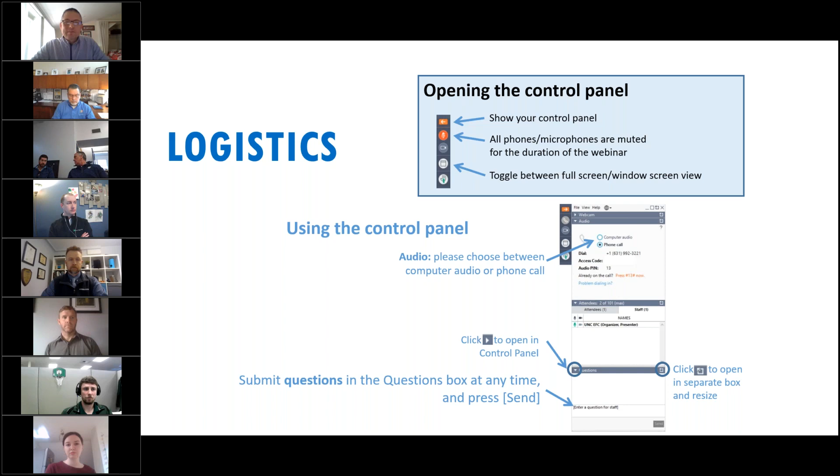For those who aren't familiar, the Stormwater Innovation Center is very collaborative, developed in collaboration with many different organizations, including the Providence Parks Department, Audubon Society, Rhode Island Nature Conservancy, SNEP Network, among many others. Most of our mission is to provide to the public, as well as green infrastructure professionals, the lessons learned in the design, implementation, and maintenance of green infrastructure systems. We have access to over 30 stormwater BMPs at Roger Williams Park in Providence, Rhode Island, to help demonstrate these lessons learned.

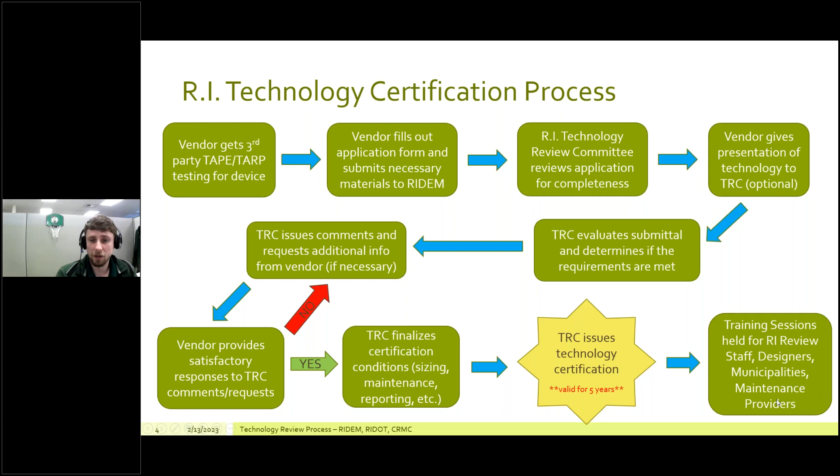From there, we have training sessions like we're having today. Initially, we'll hold it for the review staff in Rhode Island to make sure that we're all reviewing it in a consistent way. And then we'll also hold trainings for designers, municipalities, and eventually maintenance providers.

So what is TAPE and TARP? TAPE is the Technology Assessment Protocol Ecology that's run out of the state of Washington. They have a really thorough program for evaluating these technologies. In order to get certified as a water quality BMP, you need either TAPE certification or to provide third-party testing that's essentially on par with those requirements.

If you look at Appendix J of the Rhode Island Stormwater Manual, you can find more information about that. And then TARP is the Technology Acceptance Reciprocity Partnership, which kind of fizzled out, but it initially consisted of about 6 or 7 states that were all trying to work together to certify technologies.

Another honorable mention would be the New Jersey Department of Environmental Protection. They have a pretty rigorous lab testing program for pretreatment devices, so we also accept that as well for pretreatment.

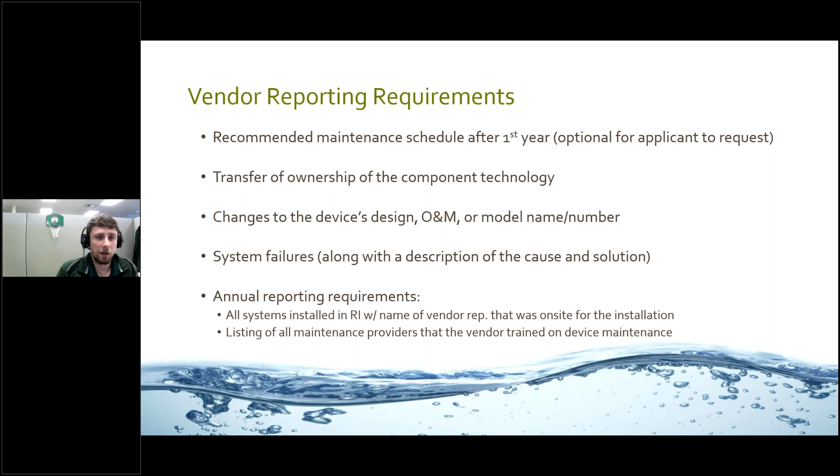Once vendors get their certification, they have various reporting requirements relating to how many systems are installed, where they're installed, any system failures or changes to the device, and transfer of ownership. Applicants can also request a recommended maintenance schedule after the first year, because sites can vary with pollutant loading quite a bit. So it's good to take a look at what you get after the first year.

Like I mentioned earlier, the certification is good for 5 years, and if the vendor would like to get recertified for that device, they need to have the adequate reporting I mentioned previously for the last 5 years, along with any additional studies, testing, or certification they might have gathered over that period. The device still has to meet the pollutant removal requirements, so say one of those reciprocity certifications gets revoked, that could affect their ability to get recertified.

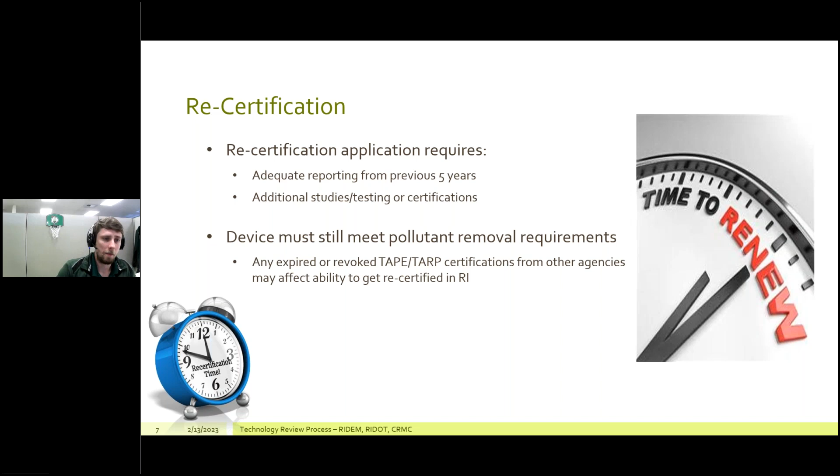If you go to the DEM stormwater permitting page, which I have right here, I'll click on that. You go to stormwater technologies, and I'll actually open up the certification for the FocalPoints so that you can all see that.

So this is the DEM stormwater page. You go to stormwater technologies. Now that will download the list, open that up.

Just give it a moment to load. There we go. And here are the approved devices.

So these are the water quality BMPs. Then we have proprietary and pretreatment devices. So you go over to the FocalPoint, click on this hyperlink right here.

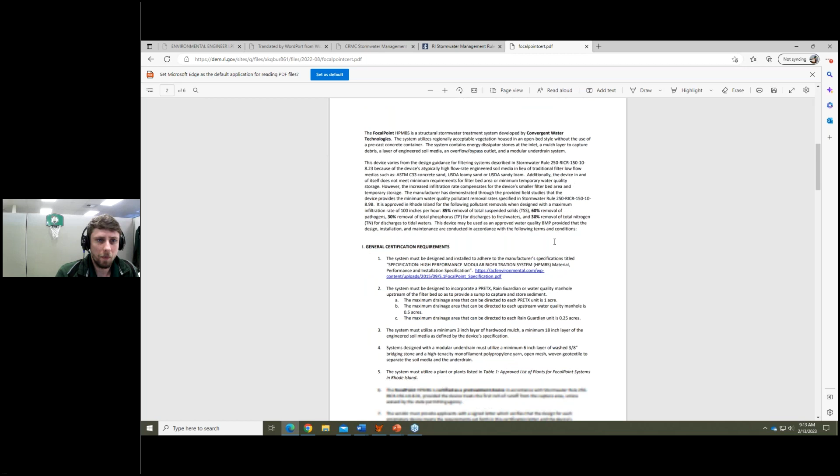And that brings up the certification, gives you all the contact information for the vendor, kind of explains how this ties into the Rhode Island stormwater rules, and mentions all of the testing that they did to accomplish this. And also a brief description of the technology, mentions the removal rates that it has, and then various design criteria.

So for this product, it needs to have some form of pretreatment for it. Rob will get into that in his design overview. And then you can just see here other requirements.

So here it's certified as a water quality BMP, and this is how it must be designed. We also have maintenance requirements, reporting requirements, and then rights. You can see Eric's signature down there.

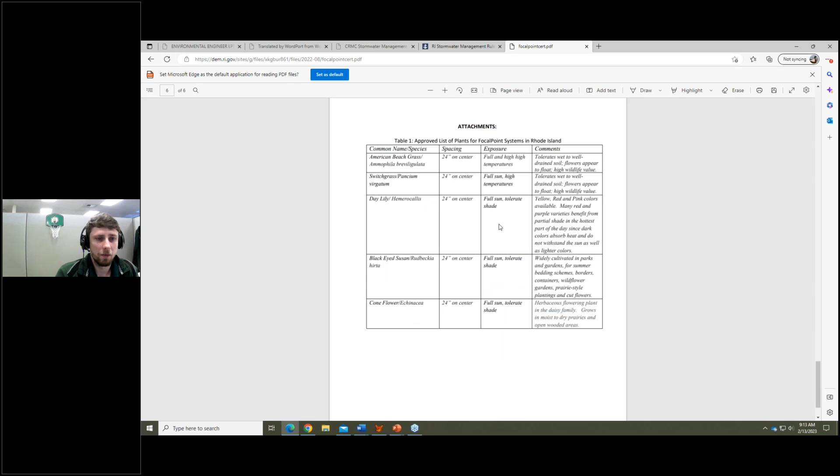These are the various plants that it can be used for the FocalPoint, and we also mention a little bit about the sizing in this requirement right here. So I'll get back to my presentation.

So that's about it. That's all I have. So we'll open it up to questions now if anybody has any questions.

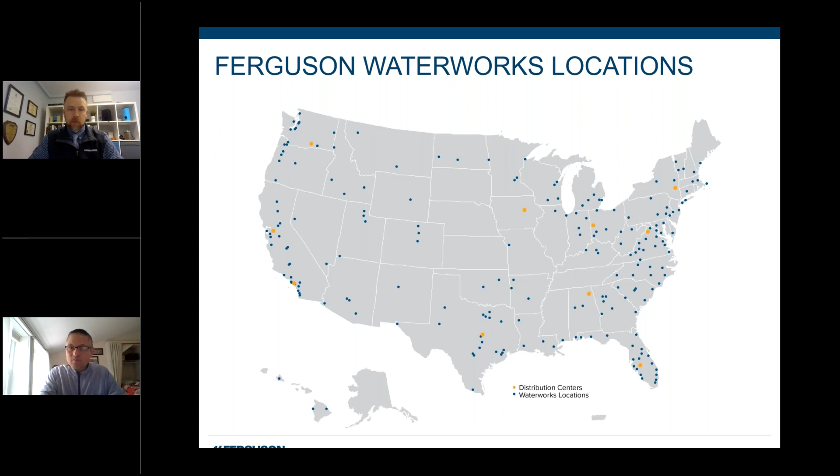Just to kind of highlight the relationship as well, Convergent Water Technologies are the innovator and manufacturer of the FocalPoint system. Ferguson Waterworks is the distributor or the seller of that system, and we also provide all of the engineering technical support that goes along with incorporating the FocalPoint system into projects.

Ferguson itself, a national company, a large footprint, about 33,000 associates. I just throw it on the board just to show that we've got some pretty big coverage there, and also have the ability to service projects in a very local way via all the different branches that we have and the experts we have on our team.

We work with all kinds of stormwater solutions, and I think one of our superpowers as a distributor is that we can look at all kinds of different systems that are out there and pick and choose different parts and pieces and come up with really interesting systems. You're going to see some of that today when it comes to having the pre-treatment and some expanded storage potential, as well as bypass protection and things like that.

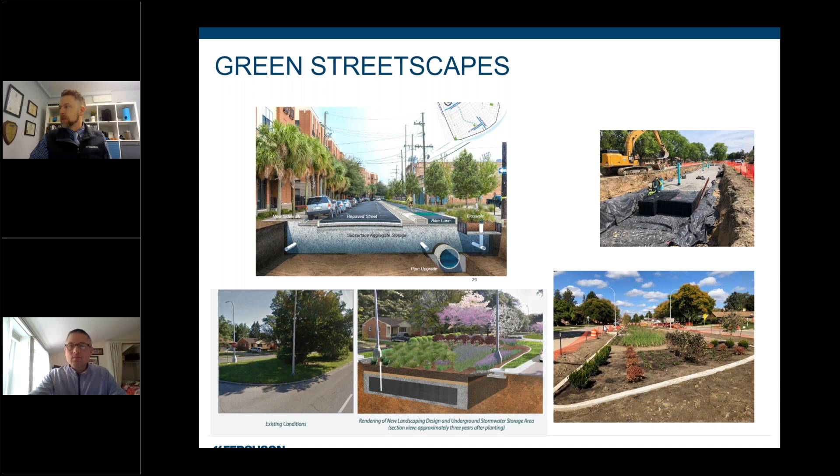No matter where you go, everyone's trying to do more with stormwater, trying to fit stormwater into places where it previously wasn't located, and we just had conveyance. Now we're trying to, when we look at these green streetscapes and things like that, we're space limited, and we're trying to do a lot more with stormwater, treat larger events and things like that.

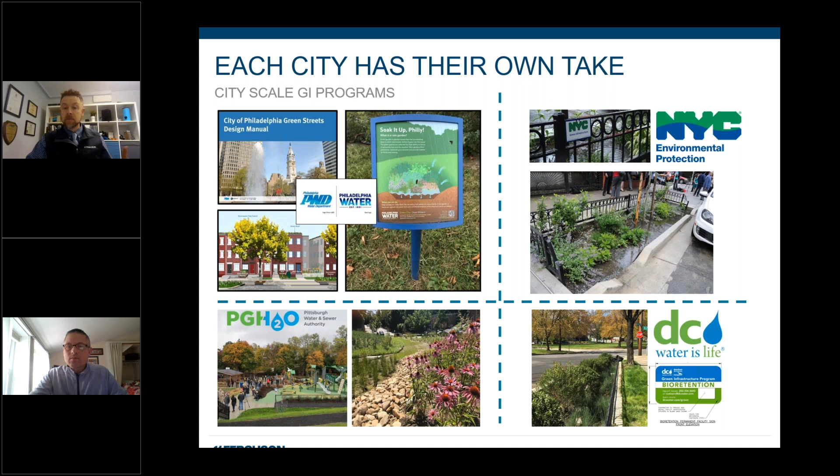Scott, I think I can hear you type in there a bit. You want to mute there?

Thanks, mate. Cheers. And each city has their own take. So no matter where you go, whether you're in any of these bigger green infrastructure cities, Philly, New York, DC, Pittsburgh, everyone's trying to come up with different ways to manage their wet weather, most often for volume, but in some cases for water quality also.

But when you get into these urban settings, there's a lot of complexities that come along with that. You're dealing with tight spaces - that's probably the number one thing. Just not a lot of room left on a site to manage stormwater. You might be working around existing infrastructure, other kinds of conflicts, affecting local business, and in the municipal retrofit world, we've got to think about what's the short-term and long-term impact with digging up a certain portion of the street and putting some kind of system in.

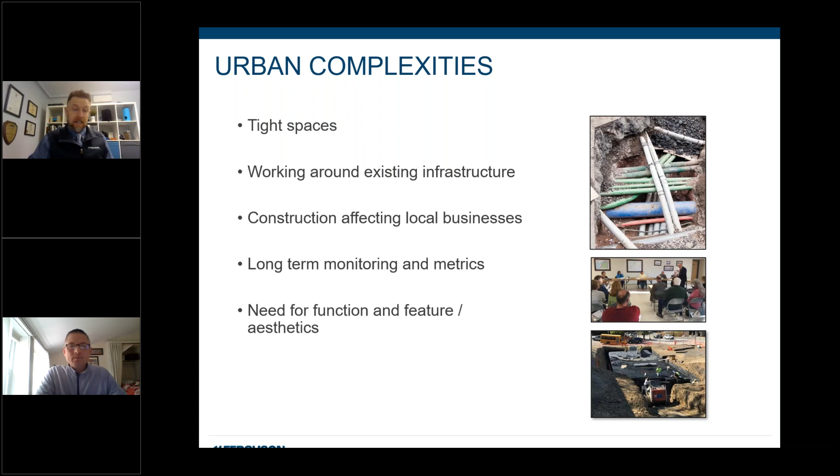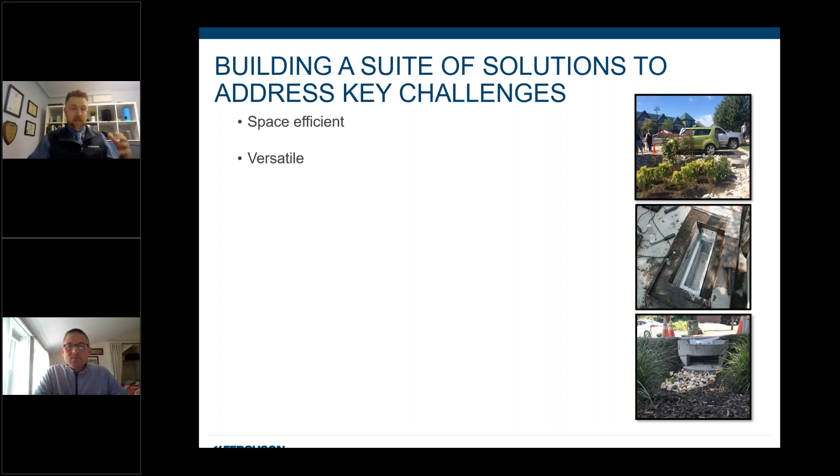And then what I'm continually trying to remind people is it's not about just digging a hole, throwing something in the ground and moving on. There's a need to make sure it's actually working, maintaining it on a regular basis to make sure that these systems are thriving. And then there's that balance too - it's not just about processing or storing stormwater, but hopefully we can actually make these systems look good as well. That's a big focus of ours, to try to balance that function with feature.

So essentially what we've built out over the last 6 to 8 years - and Scott and I have collaborated very closely on this in past roles and now in our current roles, Scott at Convergent, myself at Ferguson - is trying to come up with a suite of solutions that's space efficient, probably number one thing. Versatile and flexible is also really important. High performance, in this case today, for a water quality standpoint. Sometimes that's for structural loading and different things, depending on what kind of product you're looking at.

Easy to maintain, because maintenance does have to happen. So let's try to make it as easy as possible. Cost appropriate. And then think about how can we extend the performance of some of these systems to address some of the challenges related to resiliency and climate change.

And then just a little tidbit, and we'll touch on this a little bit throughout the presentation - one of the biggest challenges I keep seeing in urban green stormwater infrastructure programs or retrofits ties back to maintenance. And we keep finding this theme of, hey, if you can put in better pre-treatment or upstream filtering and screening, we can probably help that system last longer and continue to perform moving forward.

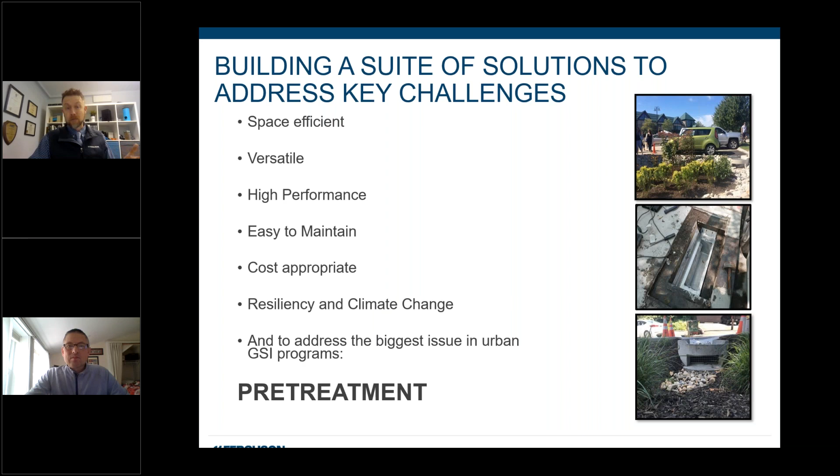And what I love about this is not only do I see this all over the place, but I really like that locally in Rhode Island, as we were going through the process with FocalPoint, one of the key parts of the certification is that pre-treatment is required. And we loved that that was the case, because in so many states, it's kind of optional.

It's not really regulatorily required, and if it's not regulatorily required, most people choose not to put it in because of the cost piece. But we found the better job you do with pre-treatment, the more you can extend the performance and life of a system like FocalPoint, and also reduce the cost and frequency of maintenance. So pre-treatment's a big deal, and Rhode Island certainly knows that. So again, balancing function with feature.

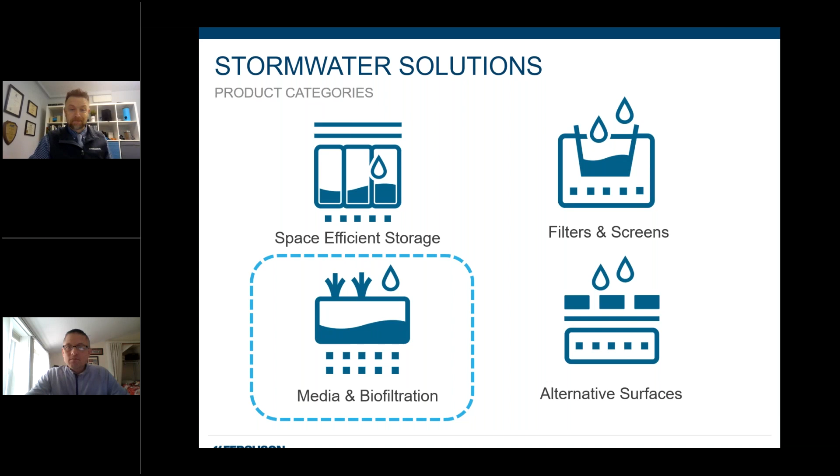The FocalPoint, as you'll see today, allows it to fit into small spaces, functionally process, treat, and manage stormwater, but can also look pretty sharp too if it's done well. So we have 4 categories of solutions: storage, filters and screens, media and biofiltration, and alternative surfaces. But for today, we're really just focusing on media and biofiltration. We'll talk a little bit about storage as we go along, because there's a modular storage component of the system that allows us to manage volume as well as the water quality processing of the FocalPoint.

All right, so let's dive in. The FocalPoint biofiltration system, as you can see in some of these images, has a small footprint. It's a modular high performance biofiltration system. We're using 100 inch per hour media. For those who aren't familiar with rates of media, that's a high flow rate versus a typical bioretention or rain garden system that might process at say 2 to 5 inches per hour. So we're treating at a really fast rate.

We're providing treatment for a variety of pollutants, which we'll touch on in a minute. And we've gone through and been very diligent in our testing to make sure that we've got approvals and certifications in all of the northeastern states and others too. We also meet all of the MassDEP ConCom requirements for using innovative practices, as well as the BWSC regulations for phosphorus. So really useful to a lot of different types of projects up in the Northeast.

To tie back to what Chris was saying about what kind of testing is needed, we've gone through a full-scale third-party field test to TAPE standards, and then we've also more recently gone through an NJCAT, NJDEP process to get verified and certified as a green MTD for folks working in New Jersey. That's less relevant for this presentation today, but we've been working hard on doing all that testing in the background.

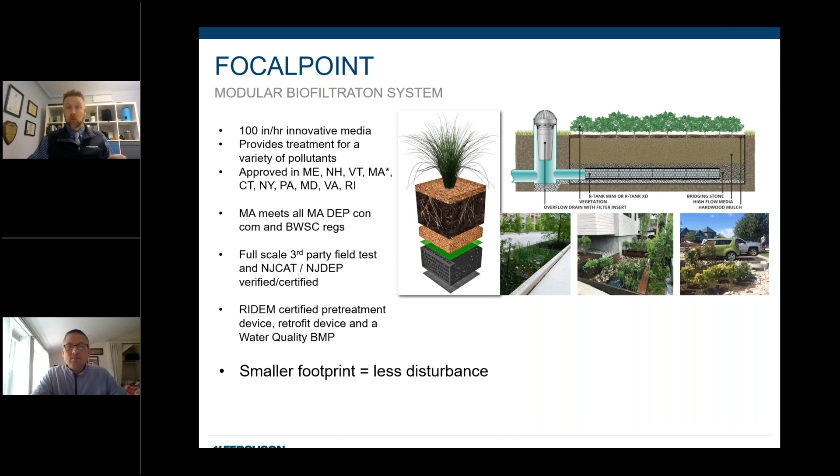But the cool thing about going at a fast rate is when you speed up that rate of processing stormwater, it allows you to shrink up the footprint considerably. So the FocalPoint's usually only going to be about 8 to 10% of the size of a typical surface green infrastructure practice like bioretention, rain gardens, and other types of organic filters.

When you have a smaller footprint, you have less disturbance, which is really helpful, specifically for retrofit or digging up some kind of city street to do some stormwater work. You don't need a lot of space. It's got a smaller maintenance footprint, so that's nice - a smaller area to have to deal with on a regular basis.

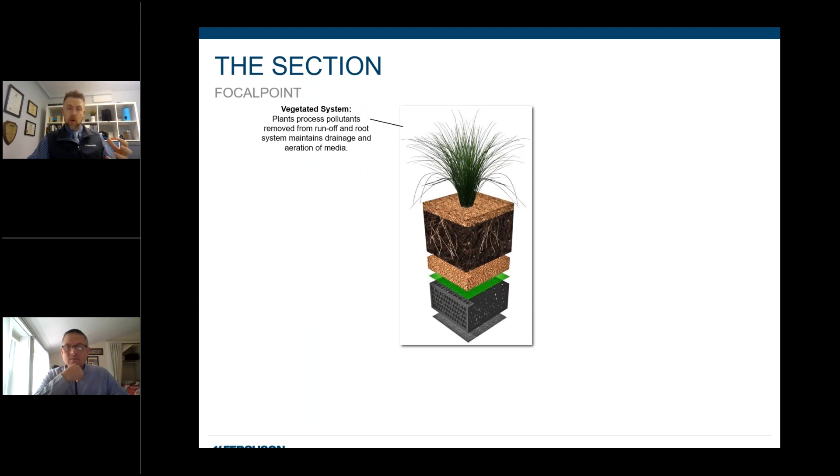And what I love is that because it has a smaller footprint, you could now actually go back to locations that you maybe previously overlooked - maybe you went to another site and thought, oh, we'd love to do a bioretention system here, but it's going to fill up half the soccer field on a school project, or there's not enough room between these two driveways on a city street to treat the full inch. Well, now with FocalPoint, you can go back to those spaces and say, we can tuck this off to the side of the soccer field, or we actually can treat the full 1 inch rainfall event between these two driveways using a FocalPoint. So it gives you that ability to go back and consider those locations, and certainly on tight sites, which are highly developed, it gives you the opportunity to manage stormwater in a very space efficient way.

So let's take a look at the section. The FocalPoint is a vegetated system, so we do require plants for that ongoing uptake of nutrients, which they want. Chris mentioned in his introduction that there is a list of plants that we have specifically for Rhode Island that you can pull from.

We have recommendations for what types of plants, and in the case of Rhode Island, there's a list of about 8 plants, and we also have recommended spacing for those plants. We don't provide the plants, but we provide that guidance and can help review that when projects come through.

We don't generally put trees in this system. We really haven't seen trees do particularly well in these high flow systems, some of the early tree box filter type concepts. It's a media that's mostly sand and fine stone with a small amount of peat moss for organic matter, so it's not that deep, rich planting soil a tree needs to thrive. So we generally go with smaller perennial plants, switchgrass, black-eyed Susans, daylilies, things that do well in droughty periods but can also handle heavy inundation.

So we can help with that. But the cool thing is you've got a small footprint, so if you really wanted trees, you can put trees immediately outside of the system in a nice, deep, rich planting soil where those trees will thrive and become part of the overall aesthetic for your site.

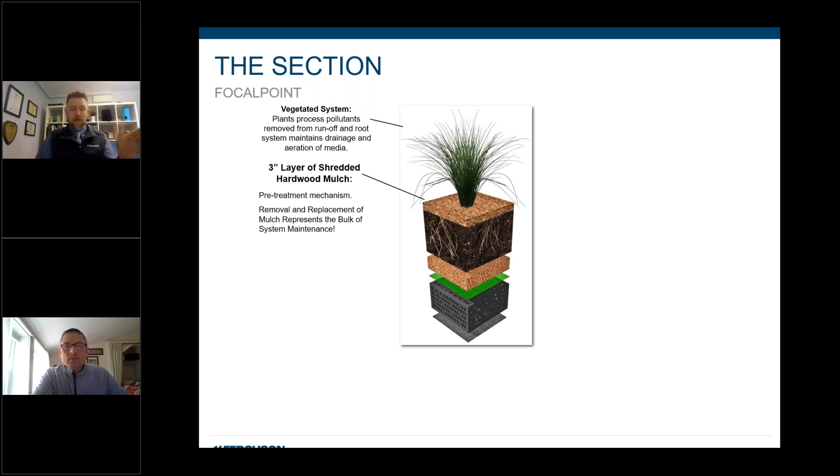We start with a 3-inch layer of hardwood shredded mulch, diligently screened so it's less susceptible to floating, and we don't want a mulch with a bunch of fines that will clog the surface. So it's a well thought out mulch.

That mulch actually really grabs and traps a lot of sediment load if you don't have good pre-treatment upstream. So that's really your focus of maintenance, removing the mulch and putting it back from time to time. I'll show you some slides on maintenance a little bit later.

Then we go into 18 inches of high performance media. That media is what's flowing at that 100 inch per hour rate, with great pollutant removal efficiencies. These are our actual tested efficiencies, but for RIDEM, these are the numbers that are awarded: 85% TSS, 60% for pathogens, 30% for phosphorus in freshwater, and 30% for nitrogen when the system is in a tidal water condition. So great high removal efficiencies in that small footprint.

After we get through the media, we go to a layer of 6 inches of bridging stone. We don't run typical fabrics through this system because those are a known source of clogging from fines over time, so we go directly from the media to this bridging stone.

We provide the stone for 2 reasons: one, so it's truly a clean stone, and two, so that the media sort of nests into that stone. We want the materials to pair well together so you don't have the media falling down through the stone. That's traditionally why a fabric would be used there, to create that separation, but we're doing that without a fabric.

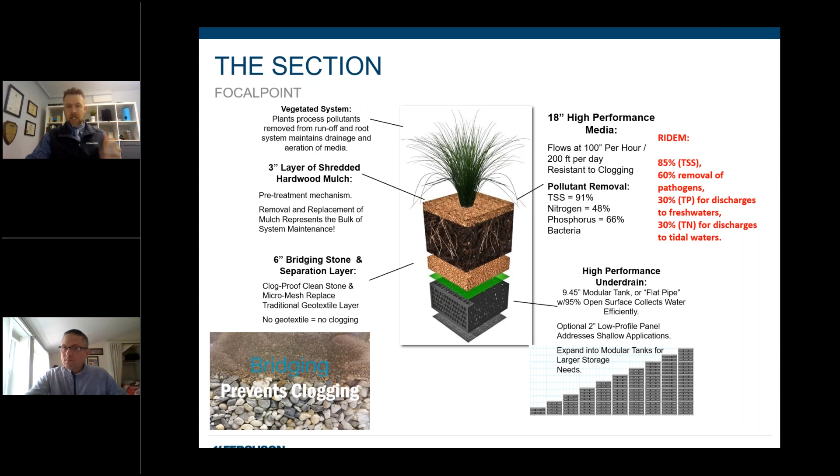So we use a modular box underdrain, called the R-Tank. Some of you may be familiar with this. I'm going to take a little turn to chat about R-Tank for a second, because it's important to understand what R-Tank is so you can understand the benefit it brings with the FocalPoint. So let's touch on R-Tank, and we'll come back to FocalPoint.

R-Tank is a 95% void space modular subsurface storage system. 95% voids means we can minimize excavation and maximize storage. With a high void space, we can overcome shallow groundwater and work around unexpected utilities because it's a modular system. We're generally using this for detention and infiltration.

For FocalPoint, it creates a really nice, high efficient underdrain. But the FocalPoint itself is really just providing water quality, and most of our projects also need some quantity control. So we can drop straight through that FocalPoint into the R-Tank, and the R-Tank now becomes our volume component to the design.

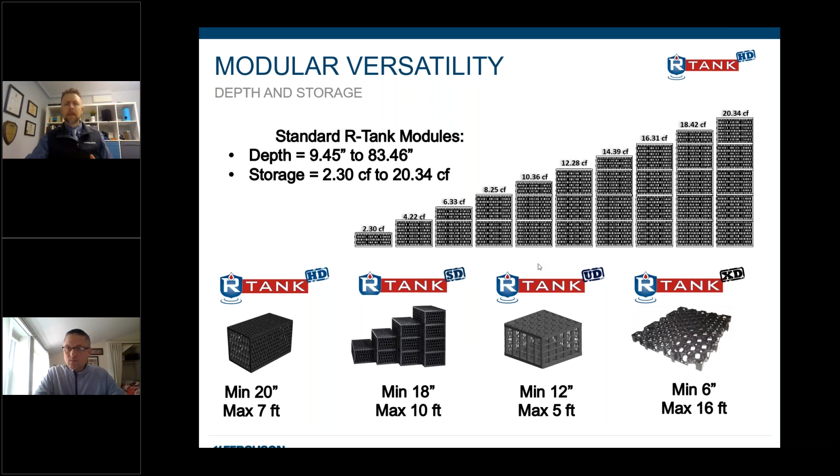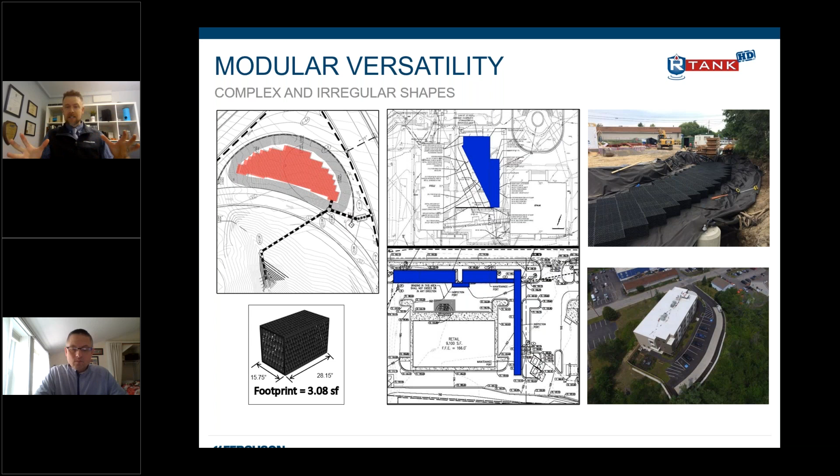We have different modules available, all different heights from 9 inches all the way up to 7 feet, with different strength ratings for different minimum covers. With FocalPoint, we're generally using our heavy-duty module. I have a mini tank I'm holding up on the screen here. It's important to note when we talk about singles and doubles and triples - I'm holding a double. The double has a common mid plate, so it's made as one monolithic matrix of plates, as opposed to having individual components sliding around on top of each other that you have to line up.

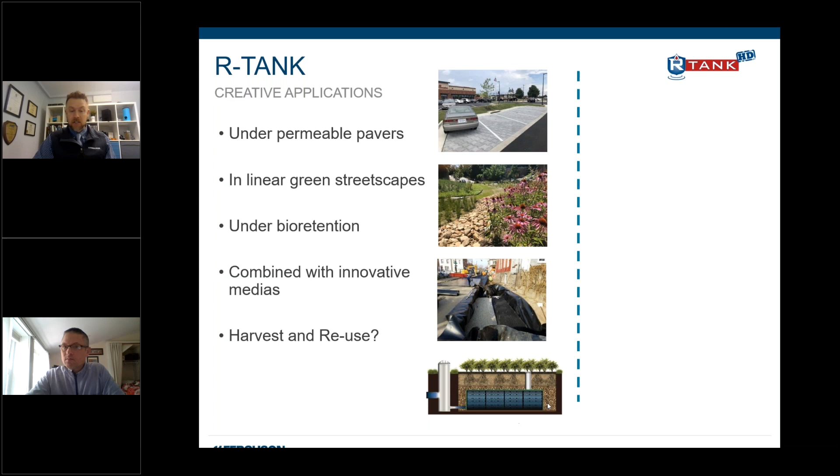But again, we get this modular versatility, and it pairs really well with the FocalPoint because FocalPoint's a small system that's very flexible in shape and size. We can also mirror that with an expanded storage system beneath, so we can really tuck these into weird and wacky spaces and get a lot of storage done. FocalPoint is an awesome treatment, maybe off to the side of the parking lot in little traffic islands. Drop down, and then we can expand this R tank, being traffic load rated, back underneath adjacent parking.

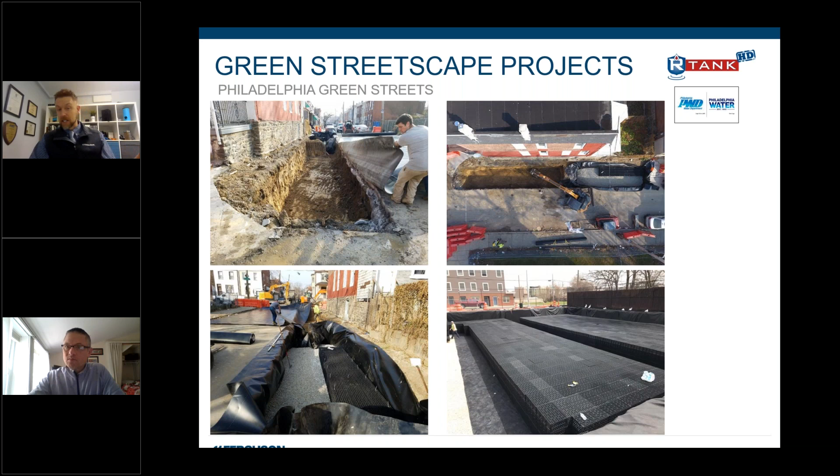And while we've done a lot of work with detention and infiltration with the system on its own, we're now starting to see this kind of creative application space where we can enhance storage under permeable pavers. We can put them in linear green streetscapes, under bioretention, or in the case of today's conversation, create a really interesting volume module that can go directly underneath the FocalPoint.

Where do folks use these? Tight spaces. Where do they use FocalPoint? Tight spaces. So we're starting to see a common theme with why these systems kind of work together. And again, being modular in nature, we can do some really interesting systems - like this project in Philadelphia, with steep streets and a need to terrace groups of tanks to work with that changing grade at the surface. Great way to provide that storage.

All right, so that's our tank. So let's go back to FocalPoint right now. When we're just doing water quality, we've got this very small footprint, somewhere between 2.5 and 3 feet in depth, and we can just pipe it downstream. Maybe that's going to a larger system, whether that's chambers or tanks or a pond, a dry pond, who knows what. But if we want to provide storage directly underneath that FocalPoint, we can do that.

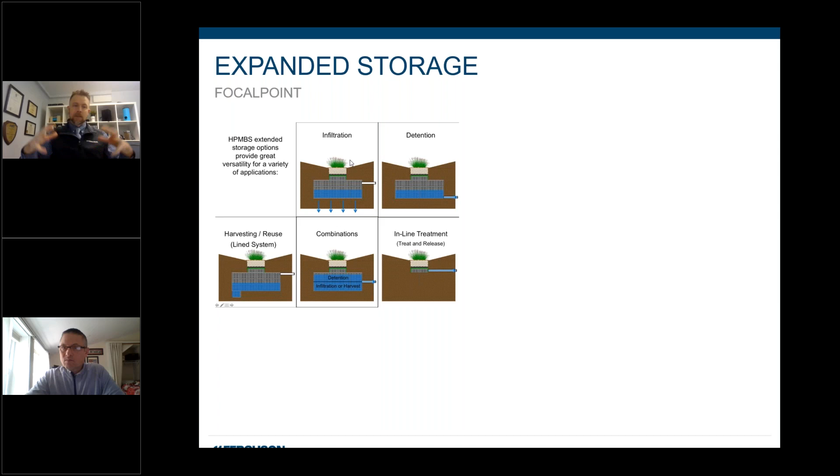You can see that in the images here. So small FocalPoints again, tucked over to the side in little islands, drop down, but now we can expand the storage back underneath parking. So it really allows you to maximize your development opportunity in terms of how much impervious area you have, what your building footprints look like. But it also allows you to fully meet all of the stormwater regulations. Sure, a surface detention pond is always going to be less expensive than anything subsurface, but on these tight urban sites, small FocalPoints drop down, larger R tank.

So again, we can have small FocalPoint media footprints off to the side, expand our storage back underneath. And I would say - Scott, maybe you can nod to agree with this - probably half the projects we do are just water quality and we pipe them out. And then the other half, there's that volume piece, and that's where the R tank comes in.

We've also done projects where there's a couple of FocalPoints around a site that go into one centralized storage system. Or again, you can do the storage directly underneath with their own independent outlet control.

The other thing about FocalPoint that I haven't mentioned yet is that it's a boxless system. So that keeps our cost down compared to some of the other proprietary systems on the market. But it also gives us a lot of flexibility in design. There's not specific sizes of FocalPoint systems. You can do the math, and we'll talk about the sizing in a minute. But you can really come up with an exact size that you need and not have to buy any additional material that you don't need for your site.

It comes in components to the sites. We've got bags of media, bags of stone, bags of mulch. We'll talk about pre-treatment in a minute. And it allows you to create really interesting shapes - it doesn't have to be a perfect rectangle. As civil engineers, we love really nice 90-degree corners on shapes, but it doesn't have to be that way. We can do interesting shapes, kidney bean shapes, work with the landscape, and make it more of a feature than just a functional rectangle of mulch with some plants in it.

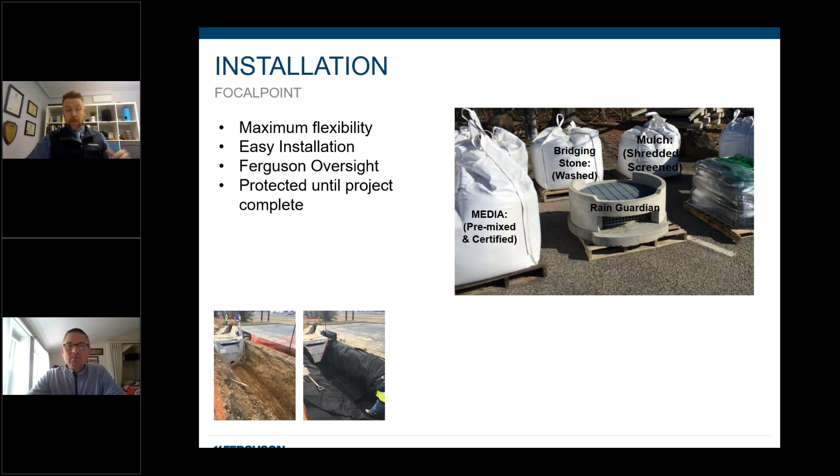Installation is pretty straightforward. You dig a neat hole. We provide about an extra 15 to 20% material, so you don't want to dig some huge hole that you don't necessarily need, but the site contractor digs a neat hole. You don't have to be a certified installer to put this in, so we work with any site contractor. We actually provide oversight in the field.

Someone from either Scott's team or our team would be out there in the field just to coach the contractor through and get it all done right. We wrap the sides with a basic fabric for separation, place the modular boxes, wrap them with that microgrid material, kind of like you're making a bed across the top and down the sides, and flare out or tuck under. Then we bring over the super sack of bridging stone, place 6 inches of stone, 18 inches of media, and then we finally put on the 3-inch layer of mulch.

Then what we'll do is temporarily cover it with a heavy fabric. We call this cap and seal. It's sort of a trendy way of just saying, hey, look, we don't want to compromise this system while the upstream watershed is not stable yet, while there's denuded slopes and sediment and grit that could get in. So we cover it with fabric. Then once the slopes are established, vegetation's in, roads are paved, all those things, you come in, cut open the fabric, take that away permanently, and that's when the plants are installed.

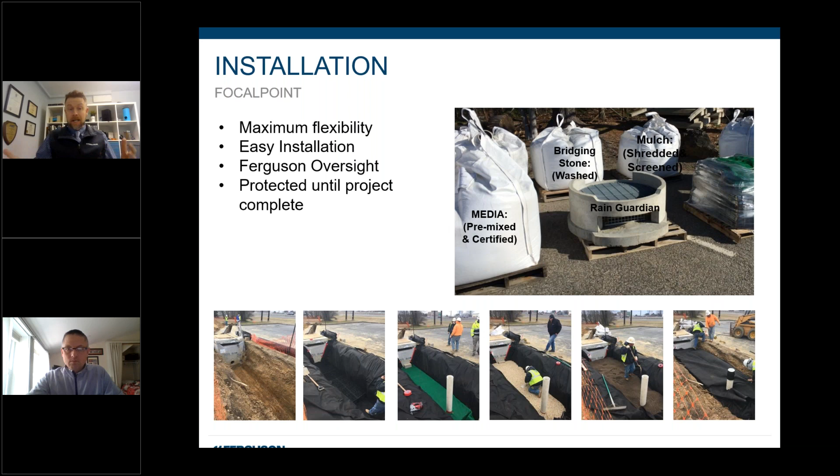We have some projects, like larger scope projects, where they might stay covered for over a year or through a full winter and then get planted in the spring. We also do some retrofit work on the muni side, where they may be able to do it all in one day and stabilize the slopes with sod or put some river stone down and plant it that day. So it may never have to get covered. It just depends on the dynamics of your project.

Sizing. I'm sure a lot of you are like, okay, so you mentioned it's a small footprint, what does that actually mean? So essentially what we're doing is we're taking advantage of our dynamic modeling, right? We're modeling this 100 inch per hour throughout the storm event.

So if we think about a very typical or a standard hydrograph, early on in the storm, the peak flows are pretty low that are coming into the focal point area. So the focal point can keep up with it, and we're processing all that water as it comes in. There's really no need for surface storage at that point. However, when we get to the peak of the storm, now there's this point where the flow coming into the system is starting to exceed the flow rate that the focal point can drain.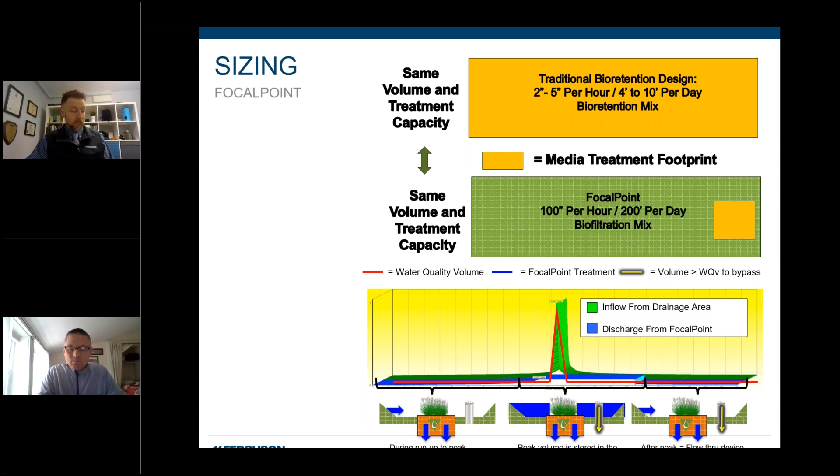And so we do have a little bit of temporary storage, usually at 6 to 12 inch depth, sometimes as high as 18 inches. We just got to think about plants and how long that water is going to sit ponded for. And then as the storm progresses, we get back through to that flow-through device. So we're never statically storing the entire volume under that hydrograph at the surface, because we're processing it as we go. And we have some really nifty little HydroCAD nodes we can use to model that.

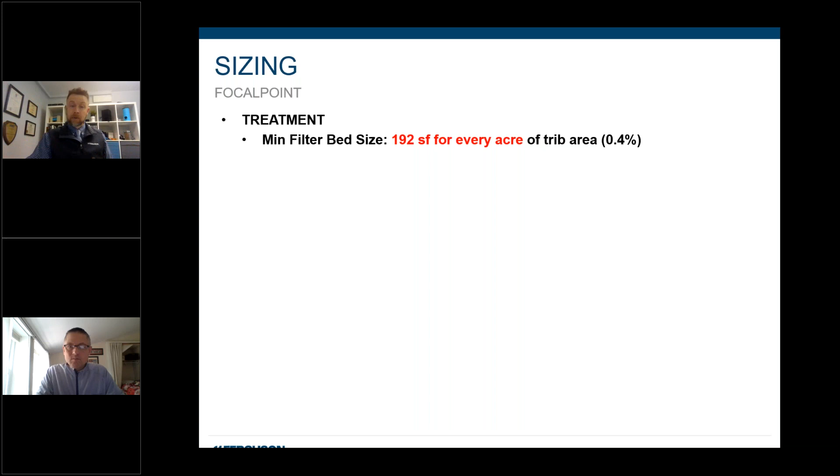We're going to go through that before we finish today. Okay, so sizing. We have a minimum sizing ratio in Rhode Island that we start with. That's 192 square feet of focal point for every acre of tributary area. So if we think about the 10 by 20 parking spaces, it's basically like a parking space being able to treat an acre of parking. So it's a really nice small footprint, easy to tuck in. That's our minimum filter bed size.

So we do actually run a model to make sure that based on the temporary storage we provide at the surface and that focal point footprint, that we can fully process the entire water quality event, which is the 1.2 inch rainfall event for most projects in Rhode Island. If for some reason when we run that event, our bypass gets activated prematurely, we can do one of two things. The low cost option is to find a little bit more surface storage at the surface, so we can draw down that peak elevation a little bit and prevent the bypass. Or if there's absolutely no more room to create a little more temporary storage, we can actually expand the focal point a little bit more beyond that minimum ratio of 192 per acre. So we're going to go through an exercise in a minute.

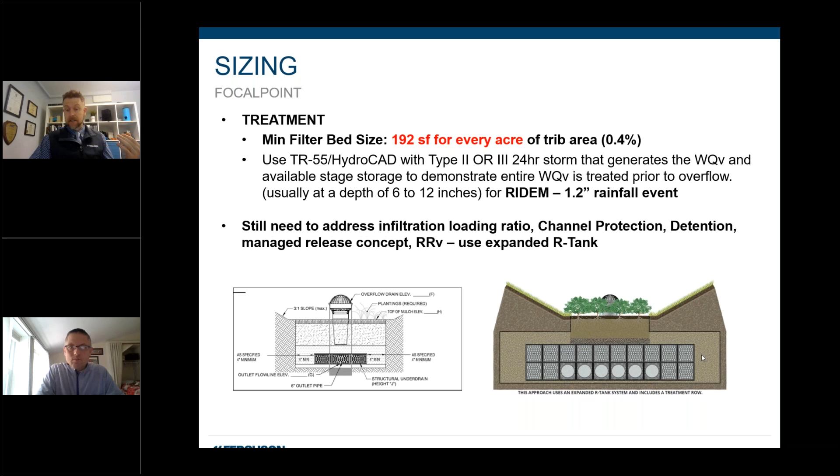You'll see that. What we found is if you've got 3 to 1 or 2 to 1 slopes coming out of that focal point area, it generally works. However, as you start getting more vertical drop-off curves and things like that, sometimes that minimum ratio needs to be expanded out a little bit.

So that's water quality. And then when we have to manage volume for a variety of uses, that's when that focal point can have an expanded R-tank system that goes out over a larger footprint.

We have a really nifty worksheet for Rhode Island as well, so you can work through things step by step that follow the guidance given by the certification Christopher was mentioning earlier. It lists the plants, shows you some tips on the HydroCAD piece. We've got a great stormwater engineer in New England, Loren Joyce is his name, who can also help you work through that and get your bearings to make sure the modeling output is correct.

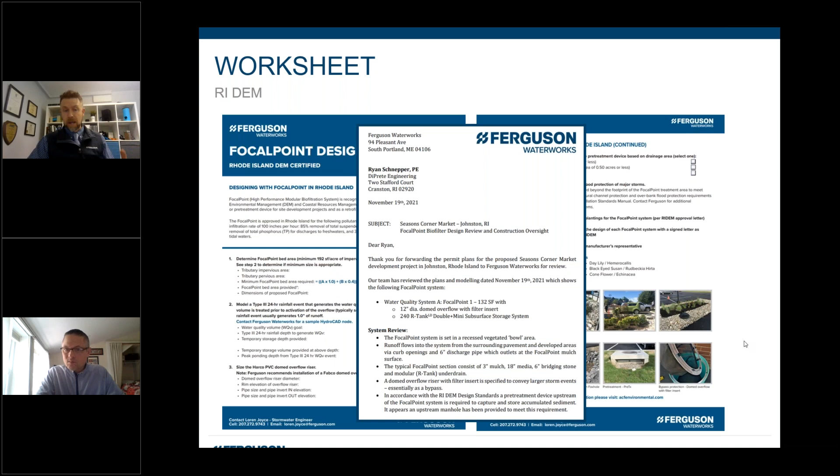We also are required to produce design review letters. So if you're working on a FocalPoint system, reach out to us and we can provide a review and then a letter that you can submit to the review team on the Rhode Island side to show that everything's being done in accordance with not only the Rhode Island DEM certification, but also our standard specs and installation guidelines.

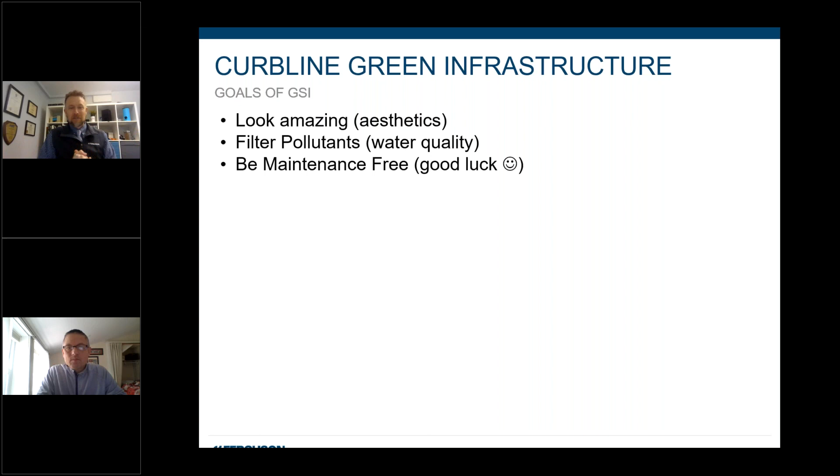Accessories. There's a couple of accessories we often recommend with FocalPoint, but to take a step back, we think about curb line green infrastructure, and that's really what FocalPoint is. It's generally going to be pretty close to the curb line, sometimes you've got a little more space. But when we think about green infrastructure, rain gardens, bioretention, FocalPoints, we really want them to look good.

We want them to filter pollutants, so provide that high level of pollutant removal. We'd love them to be maintenance free, but unfortunately that's not the case with anything in life. Cars, relationships, green infrastructure, it's all the same thing. You got to work at them.

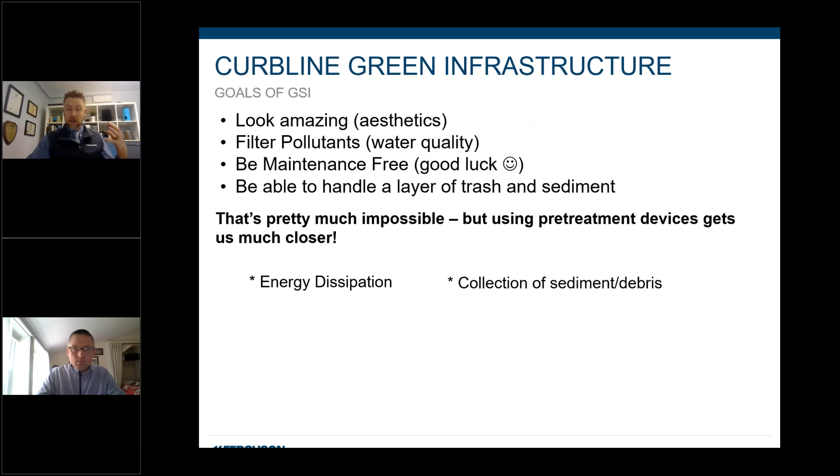But we also can send this full layer of sediment and trash to these systems, and that creates a bit of a conundrum. If we don't have pre-treatment, we're potentially compromising plants by washing them out. We're potentially clogging filter media, so it goes into bypass more and doesn't treat as much water as we think. And if we send all that sediment to the surface of the focal point, rain garden, or bioretention, maintenance becomes a little more tricky, because now you're hand fossicking for sediment all around that system.

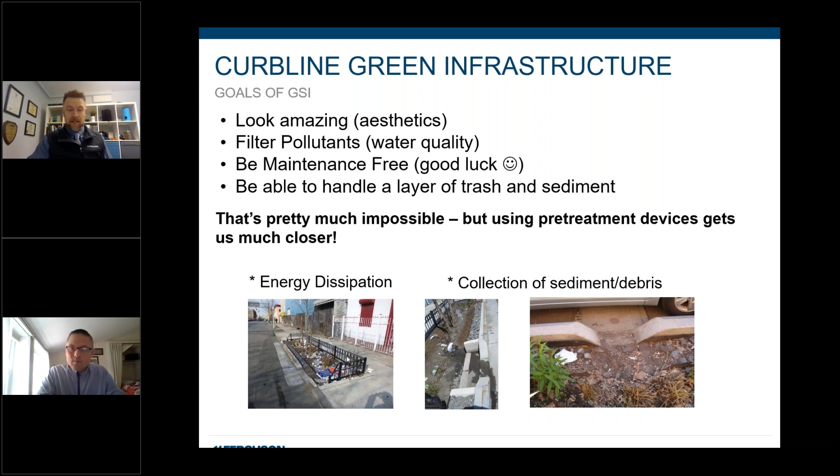So we found that pre-treatment's pretty important to this equation. The great thing is, like I mentioned earlier, Rhode Island DEM agrees with this, which is fantastic. We've got to dissipate energy, collect sediment and debris, but oftentimes we don't have a lot of room to do it. Unfortunately, curb line systems, while they can look good on plan and in artistic renderings, after a couple of good rain events on a city street can look pretty nasty.

Obviously, the civil engineers think this system's working awesome. Look at all that trash it's collecting, fantastic. While the public and landscape architects aren't too sure.

So we have two options as part of that menu of pre-treatment options required for a FocalPoint with Rhode Island DEM. One is called the Rain Guardian, for up to a quarter acre. And then we also have the Pretex, which is up to one acre of pre-treatment. So two different options depending on where it's located, the type of watershed, and the type of sediment you're expecting.

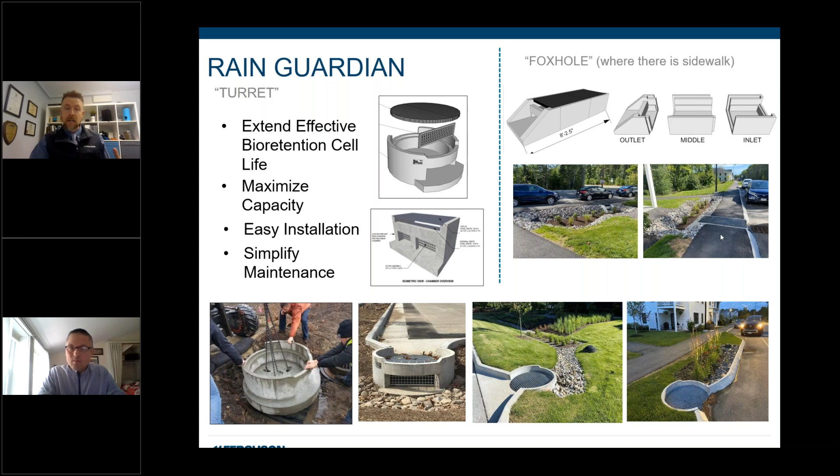So it's a great way, hence the name, to protect or guard that primary asset. This one's called the Turret—it's the circular one. There's a rectangular version called the Fortress, and then one that crosses a sidewalk called the Foxhole, which has all those same components: horizontal screen, vertical filter wall, but also a solid cover on top so you can cross a sidewalk without interfering with your pedestrian and bikeway.

A lot of folks use trench drains here, but the Foxhole adds those filters and screening elements that make it a little more functional from a pre-treatment standpoint. So that's great for small watersheds.

When you get into larger watersheds, Convergent Water Technologies, Scott's company, has a product called the Pretex—a deeper sumped module. It's generally a 5x5x5 box with a 4x4x4 inside, a suspended baffle, a weir, and then a screen on the backside. So now you get your full sump, a little bit for floatables, oils, and grease, and additional sediment storage capacity, so in theory you can store more and maintain it less frequently. There's also an unimpeded bypass across the top in case this initial chamber gets completely clogged or full.

You can see that in practice here. So again, same kind of functional idea: drop that energy out, drop the sediment out, and hopefully send relatively clean water to the FocalPoint for polishing, essentially for nutrients, bacteria, and things like that.

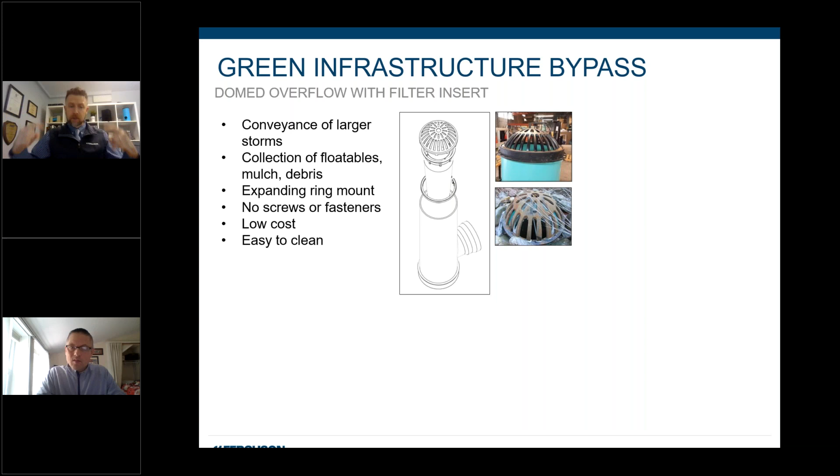Those two items, depending on the size of your watershed, are part of the Rhode Island DEM approval, which we were thrilled with because pre-treatment is really important, and in Rhode Island that's valued at the same standard.

And then the last little accessory—it's one thing to treat the water quality event, but what about larger events? Most of these vegetative practices have domed overflows to take those larger events. Unfortunately, that's where a lot of floatables and mulch can end up and eventually get downstream into whatever you have, whether that's our tank, small diameter pipes, or whatever. So we outfit our domed overflows with a simple permanent filter bag that collects any of that material that gets through.

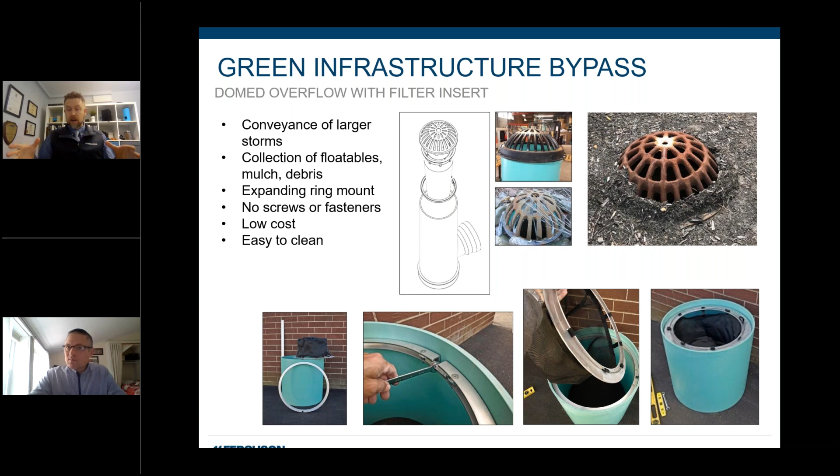Generally with our FocalPoint systems, as you'll see in some of our case studies, we have that Rain Guardian or Pretex at the curb line. We go into our FocalPoint for treatment, maybe an expanded tank if you need to manage volume, and then that bypass has one of these filter bags in it. So you get this space-efficient, high-performance, easy-to-maintain treatment train that's going to hopefully be pretty easy to own.

Maintenance. You guys still see me okay? Yeah, okay, I'm getting weird notifications.

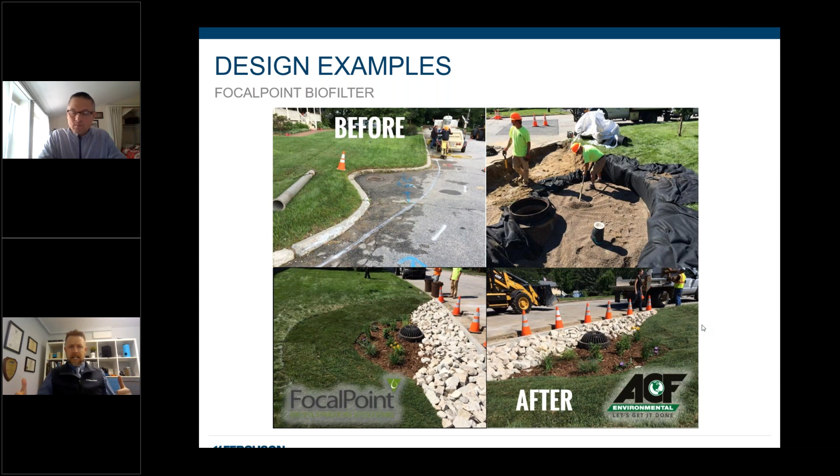Examples: curb line retrofits, easy to do. Here we actually converted an existing catch basin into the domed overflow and built the FocalPoint around it, and we had all kinds of different utility connections to that drain that we had to step in and around. That was one of the earlier projects, from probably 7 or 8 years ago now.

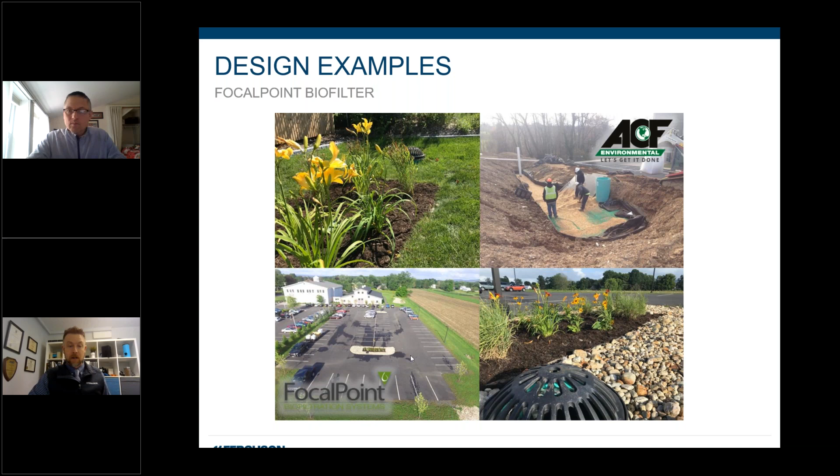Simple—this was a parking lot expansion project, looking to pave an entire parcel and put up a parking lot. This went with a FocalPoint in this island area, and then there were 440 R-Tank mini modules, about 9 inches high, back underneath the parking for infiltration. This one was in Massachusetts, but the cool thing is, you'd need that island there anyway, so using it for stormwater was useful and didn't reduce the number of parking spaces.

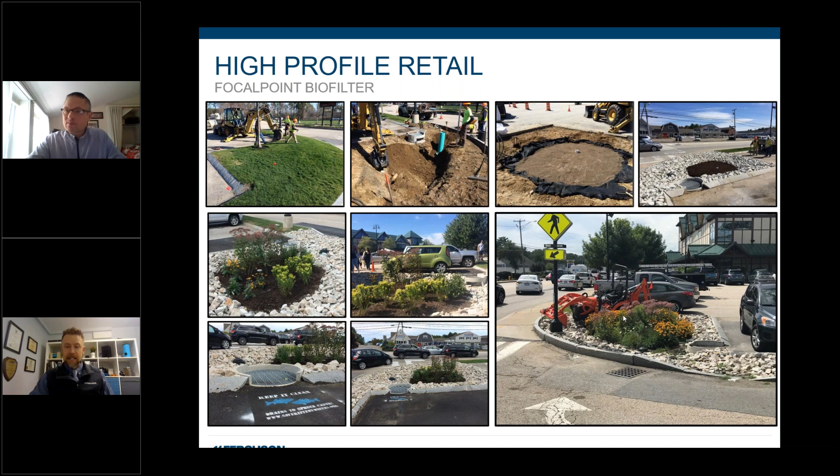High profile retail, this is one of the first ones we did, at Kittery Trading Post. It's been in for probably 8 years now. Sheet flow was already coming to this corner where there was a catch basin. We converted that catch basin into a solid cover manhole, opened up the curb with a rain guardian, domed overflow with a filter bag, and then a FocalPoint was built.

This is kind of its evolution over the years. You can see Public Works installed this one. They got a little carried away with riprap, but that's okay. And now they're displaying tractors in that area, which is interesting.

Dense residential development. Here we have a single-family home that was demoed, and they built this 44-unit housing complex on a postage stamp lot. Still had to meet all the stormwater requirements. So in this little corner here, you can see it, there's a 33 square foot focal point. And then there's expanded R-Tank doubles back underneath all of this concrete area.

For not only infiltration, channel protection, but also flood control. It was designed by a civil engineer, as you can see, 3x11 box, perfect corners, but then collaborated with a landscape architect so that we got some really interesting plantings in that system. And nowadays it looks really good.

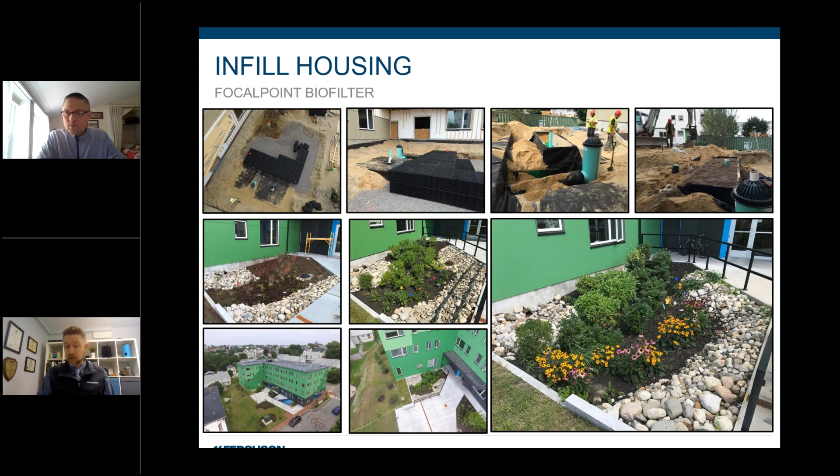What I've found is when you have smaller footprint systems, you can often fold them into tighter spaces, and even more prominent locations versus the old stormwater system you'd kind of toss out back. And when you put them in more prominent locations, I found that generally they get looked after better. Here, the tenants look after this rain garden. I think they don't even know what it is really, but they want their front entrance to look sharp.

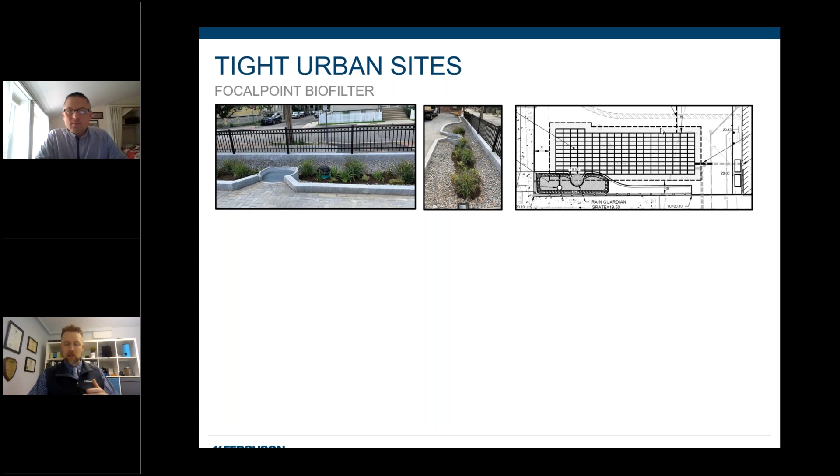This is a great little example of an urban project. Focal point off to the side of a paved parking area. Runoff comes through the rain guardian, hits this focal point. Not the most attractive looking focal point, but if you look at the plan, this is where the secret sauce is, right?

So you've got this focal point off to the side, treating all that runoff, but then the treated and the bypass go into our tank single plus minis, which are about 2.2 feet in height, back underneath that paved area. So that's again where you can leverage a system like this and still do everything you want on a development. We've seen some really interesting things from designers, sheet pile terraced walls, raised planters to work with shallow inverts in the street and pick up roof gutter lines. There's a lot of flexibility as a boxless system.

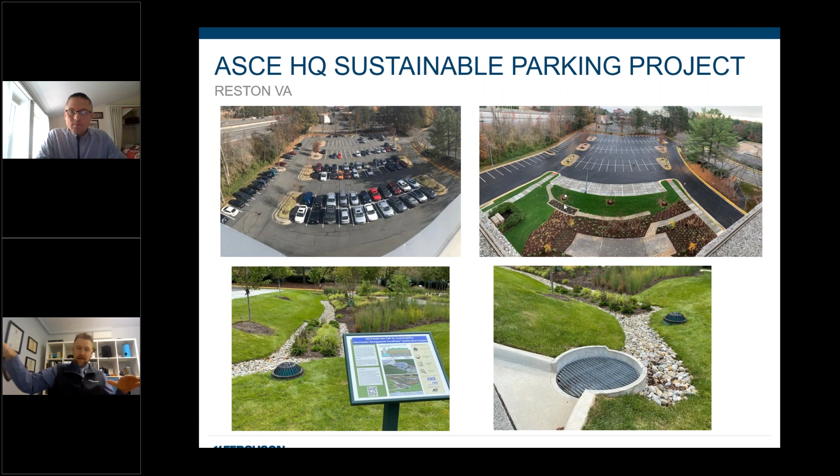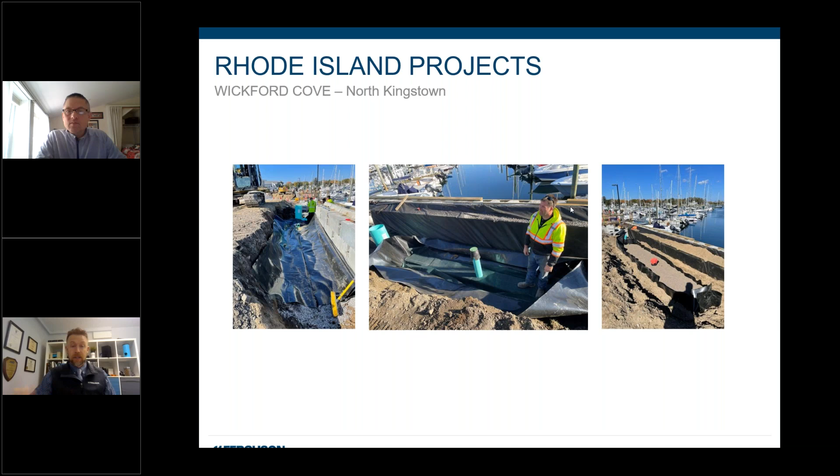We have a system at the ASCE headquarters in Reston, Virginia. We did a kind of walk the talk project down there and incorporated a number of our products. You can see the Rain Guardian here feeding this focal point. Now you'll see there's a lot of space here, but there was about a 5-foot grade change from this sidewalk to this one. So all the retaining and grading that would have been needed to level an area for bioretention, it was way more cost effective to build just a small focal point, have this little river stone channel feed that focal point, working down the grade.

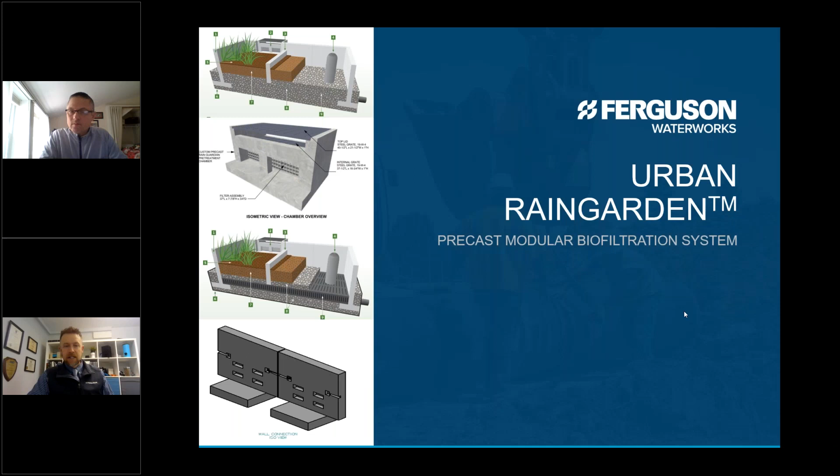The only thing we found, as people start to fold these into green roadways, is that you sometimes get into a bit of a sticky wicket with regard to the vertical curb you're trying to deal with. Since we're boxless, what do you do if you have to drop off a curb? Do you use a deep curb? Now it's exposed on both sides. Is a plow going to tap that and knock it over? How's that all going to work?

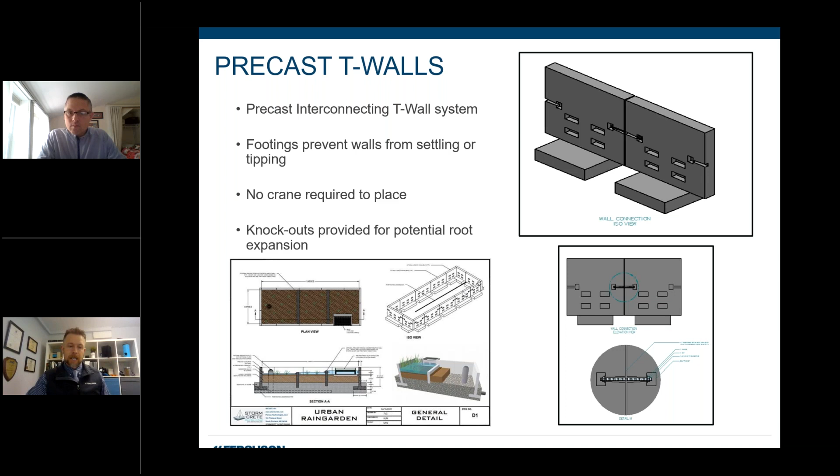So we do have one extra accessory that we added about 1.5 years ago, called the Urban Rain Garden. It's really a precast spread footing modular rain garden surround. Instead of bringing in a large box or casting something in place, this is a modular segmental system, 3 or 4 foot high, 4 or 6 foot wide, with a spread footing either on one side as an L wall or on both sides as a T wall. You can build out the formwork or surround for any rain garden or focal point. So in tight spaces where the slopes won't work and you're concerned about curb walls, this is another option you can add on, and you can still fold in the Rain Guardian, the domed overflow, and the expanded R tank.

All right, so for the last 7 minutes, I want to go through a quick overview of what it looks like to work with this system and how to model it. Most of that modeling happens in HydroCAD, a program I'm sure many of you are familiar with and use for a lot of your modeling.

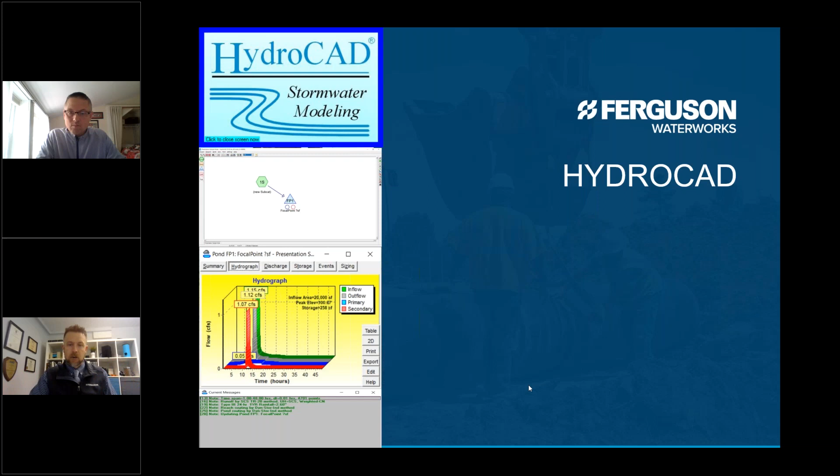The focal point isn't in HydroCAD as a chamber wizard type option. The R tank is, which is good, but for the focal point there are too many variables to get that in there at this point. But we do have pre-set-up nodes with a lot of the right components, so if you're working on a system like this, you can reach out to us and we can give you that node and show you how to manipulate it to get it to work.

Essentially, if you're using the focal point just to treat and release, your subcatchment goes to the focal point only. If for some reason you have an expanded R tank beneath, you actually model the R tank as a separate node, because you want to model the 100 inch per hour discharge from the focal point into the R tank. Then usually the R tank will have its own outlet control downstream. So while they're directly on top of each other, we actually model them as one pond feeding the next, and we can show you how that works.

I'm going to pull up HydroCAD in just a minute. But essentially, you're going to have 2 storage inputs: the cylinder of the focal point, and also the surface bowl to handle some of that temporary storage.

In today's example, the surface of the focal point, that surface of mulch, is set at elevation 100. And you'll see the focal point invert itself is at 97.75, so that's 2.25 feet lower. That represents the 3 inches of mulch, 18 inches of media, and 6 inches of stone—2.25 feet total. So essentially it models all the way down to the point where it would drop into the R tank.

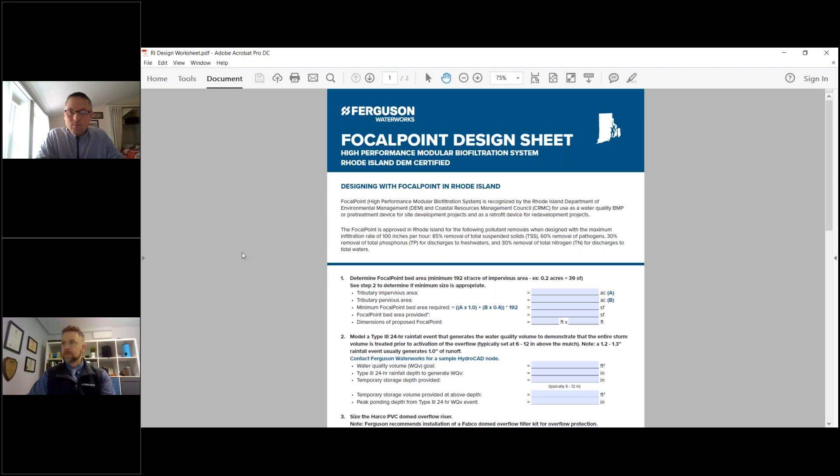We essentially say exfiltration rate, but it's the primary routing. So that's that 100 inch per hour rate coming through the system, discharging to wherever we're going. And in this case, I have a domed overflow set at 100.5, so that's 6 inches above the surface. Again, that could be 6, could be 12, maybe up to 18. In today's example, we're going to keep the temporary storage at 6 inches before we spill over.

So what I'm going to do now is just pull up our design worksheet and then also our HydroCAD model. All right, can everybody see that design worksheet? Get a nod, Scott. Yep, you can see this.

See the worksheet. Okay, so in today's example, what we're going to do is assume that our watershed area is 25,000 square feet. We convert that to acres for our worksheets, which I think is like 0.574 or something like that. We're going to assume that it's all impervious, so there's no pervious area, and then we have to work out our minimum focal point area. The minimum focal point area is 192 square feet per acre. So if I take 0.574 and times that by 192, that tells me my minimum focal point area is 110 square feet. Now we're going to take that information back to HydroCAD and see if that minimum area is sufficient.

So scooting over to HydroCAD, can everyone see HydroCAD now? Yep, okay, awesome. So what we're going to do is just quickly set up a node here, and we're going to just call this Subcat 1 for today, not a very fancy name.

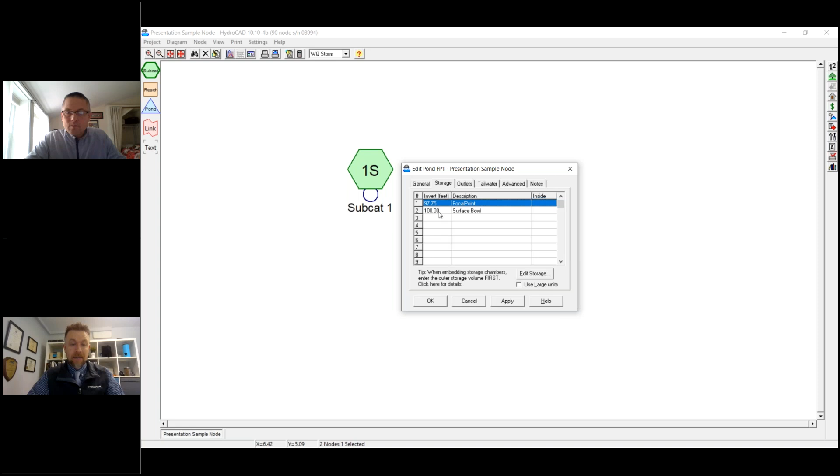So for now, this was set up as a 4x5, but I'm going to change that to a 10x11. Again, it doesn't have to be a perfect shape - we're just really trying to define the surface area. It can be whatever shape you want. You'll see that height of 2.25, so that's going to represent the area from 97.75 up to elevation 100.

I'm going to allow exfiltration, and the reason for that is it's going to help me define that 100 inch per hour rate in a minute. And I assume some kind of aggregate void space of 20%. It's probably larger than that, but it's just an assumption, and it's a small area, so it's not going to help much with the volume.

And then the surface bowl, so at 100, okay, base area will go with 110. We're going to assume that the surface area is 100.5. So this is now modeling this area up at the surface. Void space is 100% because it's an open air bowl. And I want to make sure that I don't click allow exfiltration here, so I'm almost assuming that bowl area around the focal point is essentially paved - there's no losses. If we click allow exfiltration, it's going to allow that 100 inch per hour rate everywhere, and that's going to make it seem like the focal point is overperforming.

On the outlet side of things, at 97.75, I have this 100 inch per hour design flow rate as primary, and constant velocity to the surface area.

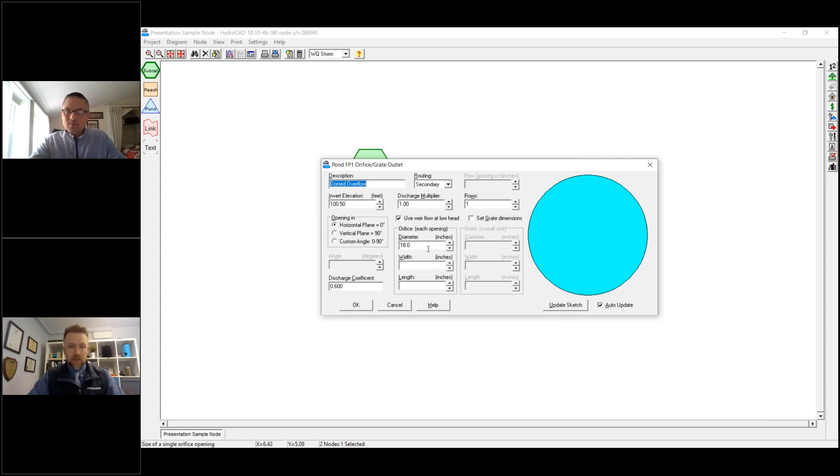Little trick here I found from HydroCAD over the years: if you add a phase-in depth of, say, even just 0.1, it helps calm the oscillations. If you have a phase-in depth of just 0, you'll get some oscillation warnings - we get the kind of wiggly worm hydrograph. If you put in this phase-in depth of 0.1, it actually smooths out that hydrograph and gets rid of some of those oscillation issues. So that's just something to think about, not even just for a focal point - that's just a general kind of tip.

And then again, at 100.5, I have this domed overflow set, horizontal plane, so it's essentially a circumferential weir. I picked 18 inches in diameter, but you've got to come up with the right size for that and hit OK. All right, so now what we're going to do is link that up so that that watershed area is feeding that focal point.

It's also important to make sure you use the dynamic storage indication method, so that you're getting the tailwater impacts of anything upstream from what's happening downstream. That's just a rule of thumb for any time you're modeling ponds or anything with detention.

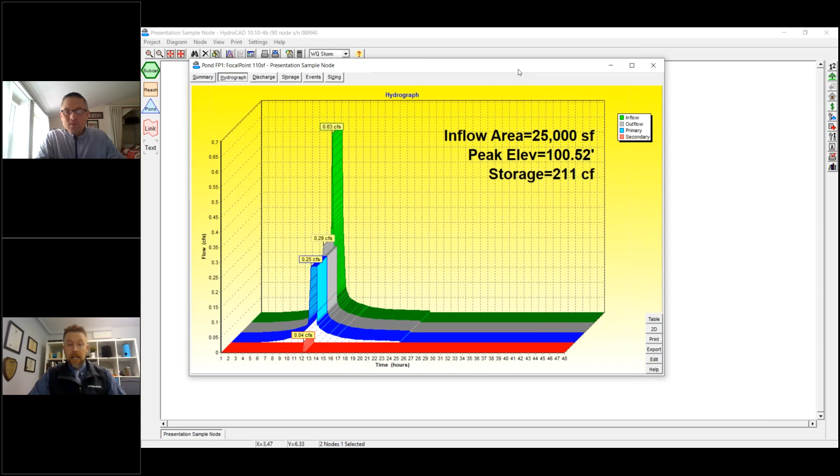For the rainfall event, I'm assuming a Type 3 24-hour storm, using this 1.2 inch water quality storm for today. Let's look at the watershed first. You'll see the runoff depth is 0.99, telling us that the 1.2 inch event Rhode Island uses is pretty good at predicting what a 1 inch runoff depth would look like. That looks to be in good shape.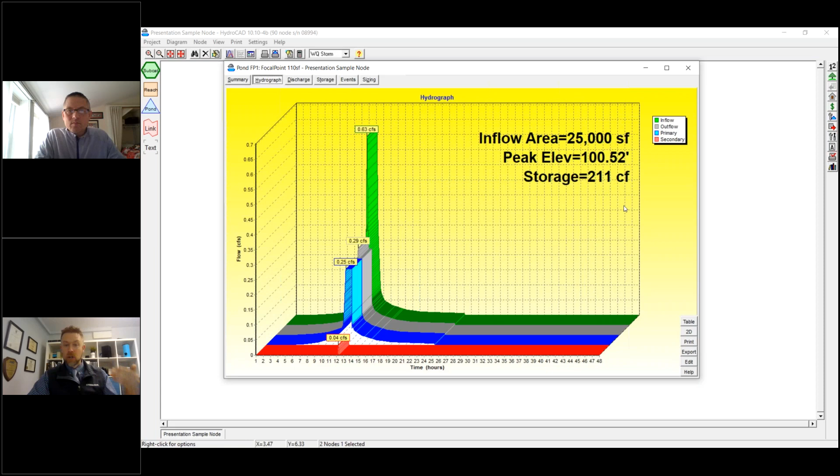Now let's have a look at the focal point. Just going to expand this a little bit. You'll see that we've got a bit of a problem here. That 110 square foot focal point has a peak elevation of 100.52, but we set the dome overflow at 100.5. What that's telling us is, you can see here, that secondary bypass is activated just a little bit, but essentially we're not getting all that flow through the focal point.

So this would not be a 'we're done' kind of situation. We have to go back and come up with a better solution. Now we can do two things here. The easy thing is to say, let's increase the size of the focal point, let's go up to 120 square feet, 10 by 12. Let's see how that goes. We'll run it again and take a look at the results. Okay, good. Now we're below 100.5 for the peak elevation, and the secondary flow is at 0. So this would be a good solution.

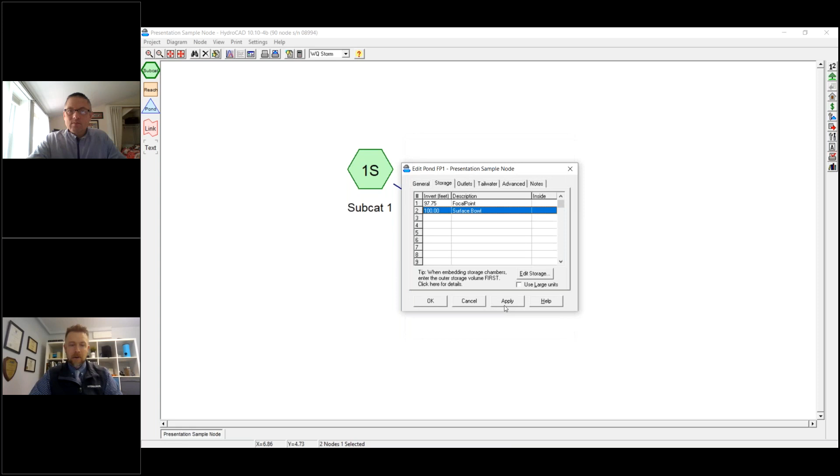However, 10 square feet of additional focal point adds cost to your system. So we could also say, I really don't want to spend any more money, I want to stay with that 110 square foot minimum system. But I think I can get a little bit more surface storage, maybe a base area of 200, up to 700 by the time at 100.5, and maybe 1200 when I get to 101. Now let's see if that works.

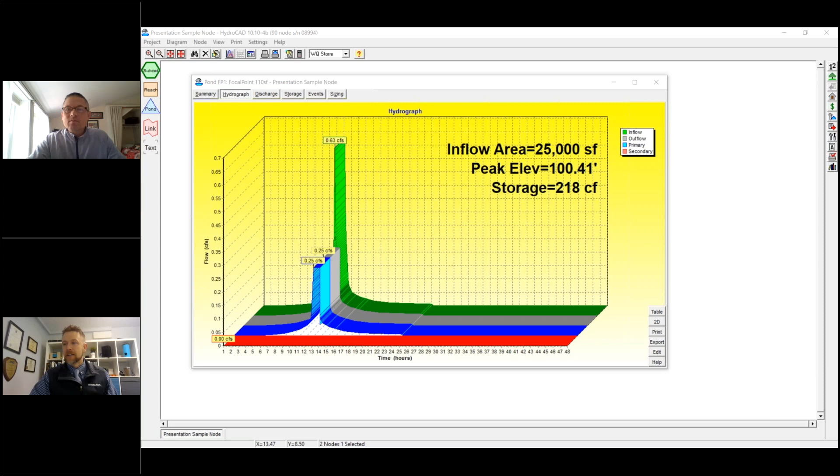So we run through that situation, and great, same again. So now even with that focal point at the minimum size of 110 square feet, we have achieved treatment of that entire water quality volume because we have a little bit more temporary storage. That's sort of the process we generally work through. Obviously I practiced this one in advance to work out this kind of situation, but some projects take 3 or 4 iterations before you come up with the correct solution.

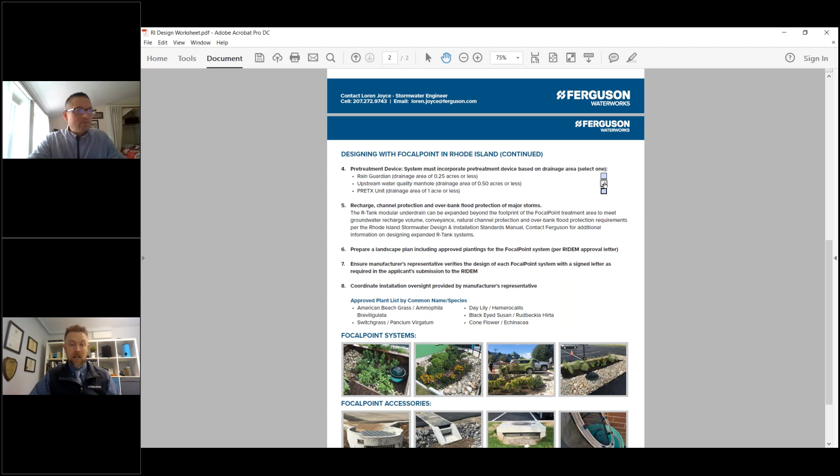So if we go back to the worksheet now, we could fill out the rest of it. We could say we need 110, or maybe we didn't have that room, so we go with 120 here, approximately 10 by 12, or we could say irregular shape. Then there's a few other things we have to fill out to demonstrate that yes, we did that 1.2 inch storm, whatever that water quality volume was, the temporary storage depth of 6 inches, and you're pretty much done. The only other thing to check is, this is more than a quarter acre, so I could either use a water quality manhole or a PRETX.

So what am I doing for pre-treatment? Is there a landscape plan? Have we reviewed the plan and done a letter for you? And are you using some of the plants from the plant species list? That's kind of the process we work through.

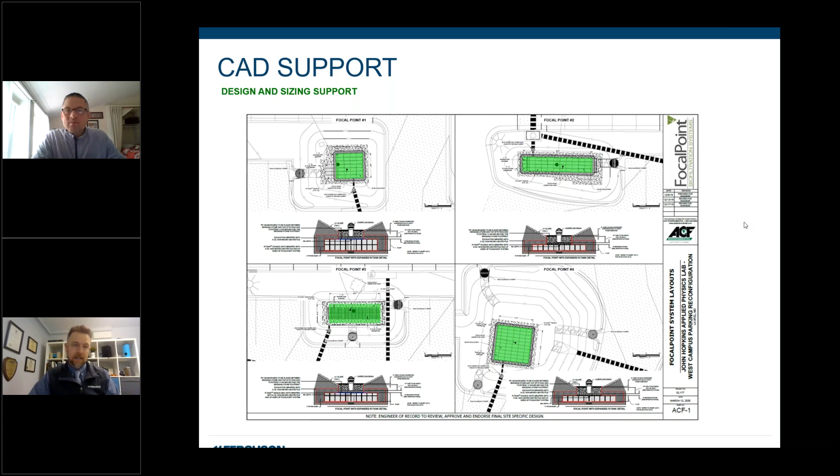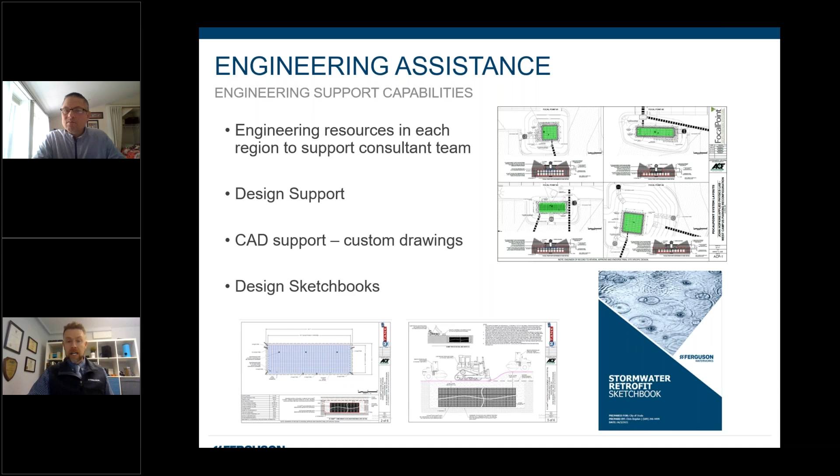We can help a lot also with layout, sizing, sections, plans, these types of things. We've got a great engineering team who can provide design support and CAD layouts for all these systems. Some engineers we work with like to work with us collaboratively through the whole process. Others say, no, I got what I need, I'll go do this and just come back to you for review. That's totally fine too. We also do what we call sketchbook.

So if you're looking at a brand new site or looking to do retrofits in a certain location, we can come out and help do a windshield survey and come up with some ideas for you. I touched on this before, but should also mention we are out in the field too. We produce quality submittal packages and host our own pre-construction meetings to make sure folks with systems like FocalPoint, R-Tank, and others know how the system goes in, and we help provide site visits throughout those installations.

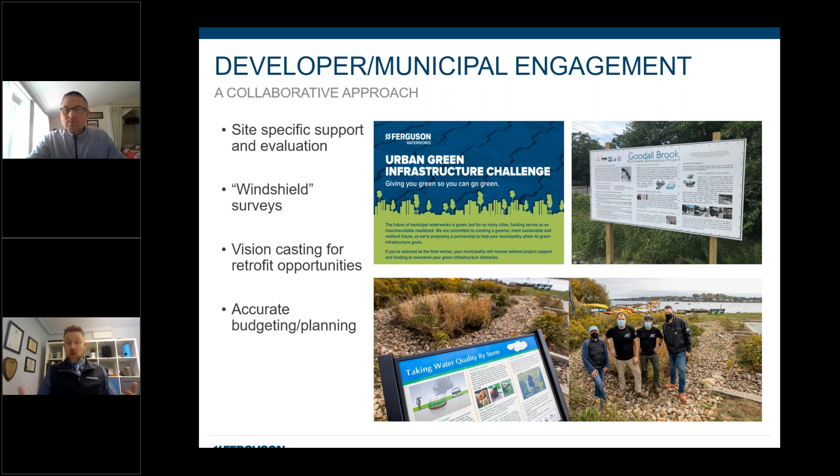Any kind of closeout that's needed post-installation, maintenance, support, and coaching. For my team, and I think Scott operates the same way, we're really looking to not just deliver products to the site and wait for a check to come in the mail. We like to get out and help, so if we can assist with site-specific support and evaluation, windshield surveys, and vision casting for retrofits, we're the ones selling this material directly to the owner or contractor.

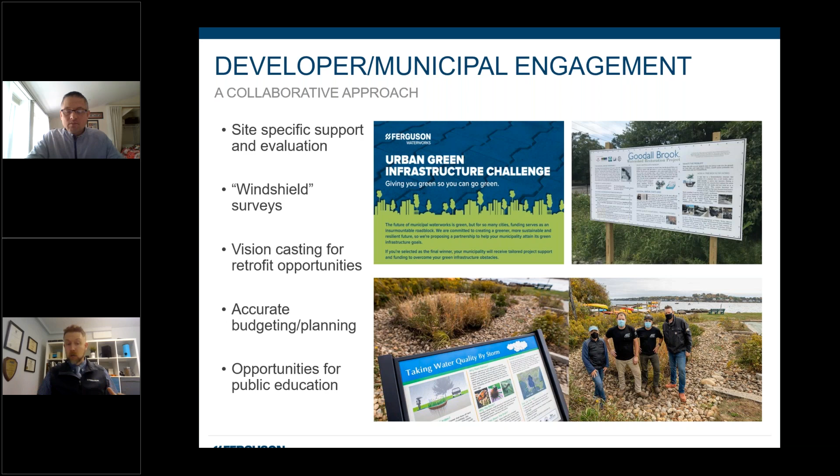So we have very good budget pricing tools. We can turn that around for you very quickly, so you know what you're looking at for your stormwater budget. We also like to help with maintenance training, and we've designed a number of educational placards to help folks tell the story that this isn't just digging a hole and throwing something in the ground, but there's environmental impact, and the ability for these systems to have social engagement and community impact.

So with that, I thank you for tuning in to this portion. I'll hand it back to the presentation team. But certainly between Scott and myself and the teams that we both work with, we are fully ready and able to help you with projects moving forward.

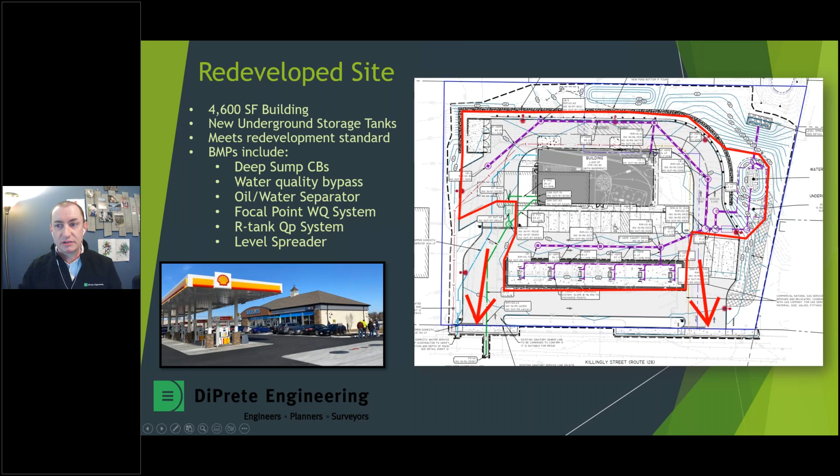BMPs on the site include deep sump catch basins. We have a water quality bypass manhole. We have an oil water separator. We have our FocalPoint water quality system. We have a lined R tank system for peak flow mitigation. And finally, we have a level spreader in the rear of the site.

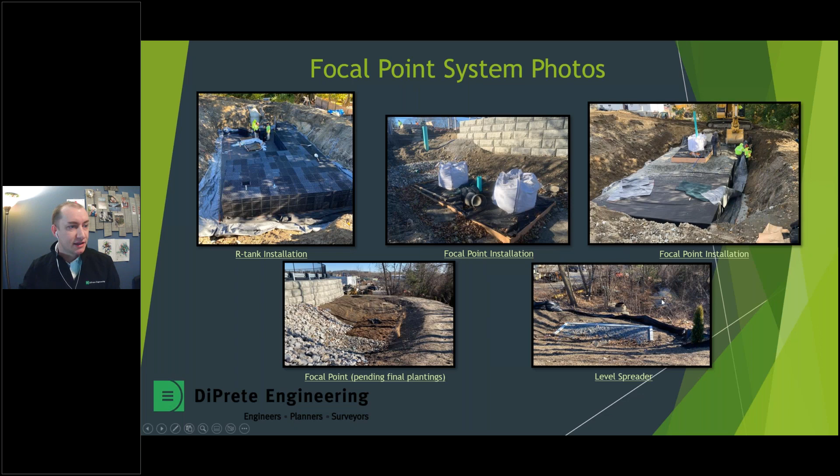So here's some pictures of the FocalPoint system. First, we have the R tanks going in. This picture here is of the FocalPoint. Over here, we get the FocalPoint actually installed on top of the R tanks. So again, the smaller storms are going to flow directly to the FocalPoint system and drain down into the R tanks. The larger storms are just going to go directly into the R tank system.

Here is the almost final product, still pending some plantings here that will be installed as soon as the weather allows it. And the last picture here is just the level spreader, and you can see the wetland in the back, which is the ultimate discharge point.

As far as post-construction maintenance, as part of the DEM certification, we're required to enter into a contract with a certified maintenance provider. In this case, we're using Stormwater Compliance LLC. During the permitting stage, all we did was provide a signed letter of intent to enter into this contract agreement, and we should be executing this contract this week. After that 2-year maintenance interval, the owner will take over the maintenance of the system.

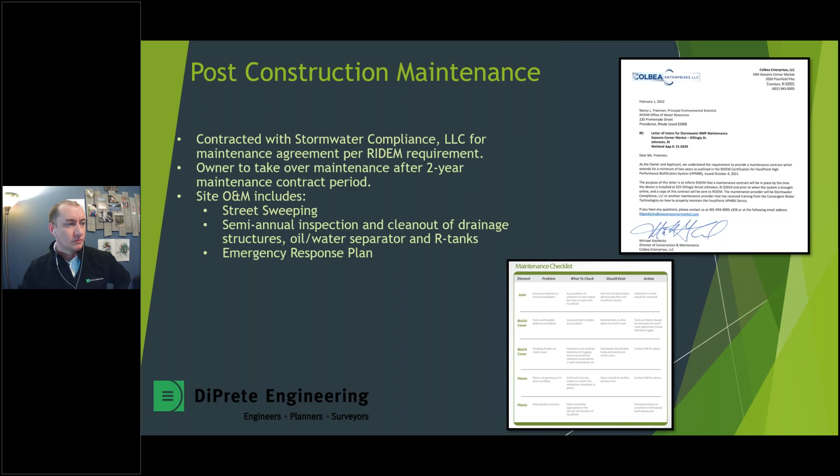Site-wide, the O&M includes street sweeping, semi-annual inspections and clean out of the drainage structures, the oil water separator, and the R tank. And the gas station here has a pretty robust emergency response plan.

So generally, that's all I had just to describe the system. I'm happy to answer any questions.

Thank you so much, Mark. There was a question that came through from Shannon: advice or strategies for getting local DPW buy-in, especially for long-term maintenance, if incorporating these in public ways, lots, etc.

Yeah, so I mean, I would say you can really lean on the fact that Rob and his team are very much involved in the design of these, and especially with DEM, you're kind of required to enter into that maintenance agreement with a certified maintenance provider. So having those two things, you can kind of hand those to a DPW and say, hey, look, we're absolutely going to learn from the pros on how to maintain this thing. So I think that should give them a pretty good level of comfort there.

There were also a couple questions that came through about how you clean out the R tanks once they're installed. So I believe the R tank clean out, you probably use a vac truck with just a 4-inch hose. And then, once there's inspection ports, if there's any kind of sediment in there, you can take a look. There's a certain threshold, I think it's about 2 to 3 inches. Robbie, you can probably speak to this better as far as how to exactly clean these out.

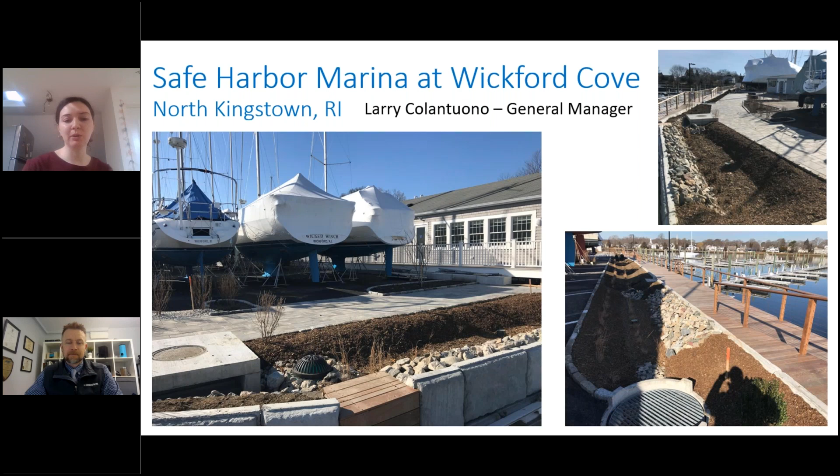So there's really no prescribed replacement period or life period, and I think the better job you do pre-treating and maintaining, the further you can extend that.